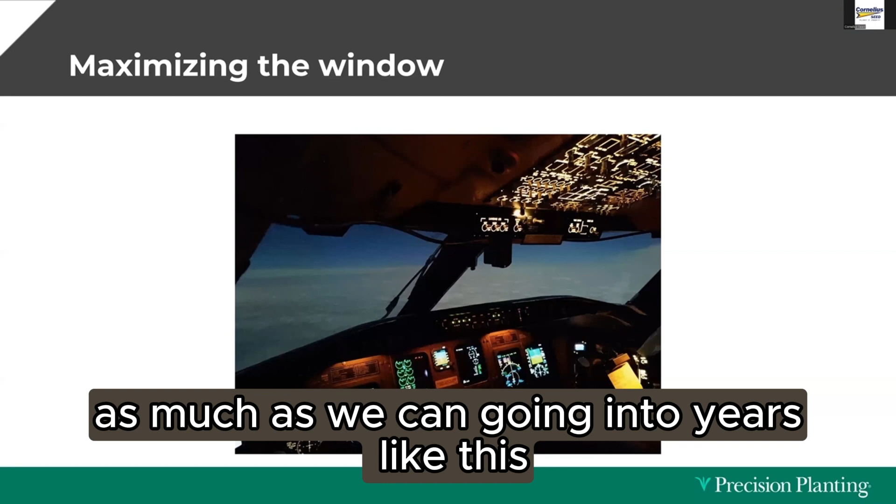So as you guys think about getting ready to get in your cabs, and you got these great big windows out front, we'll think about flying. Anybody go down to Florida or down to the beaches this year? You got on the airplane, and we got the pilots up there. They got little bitty windows on these big airplanes driving us around the world. But they actually are trusting in something else.

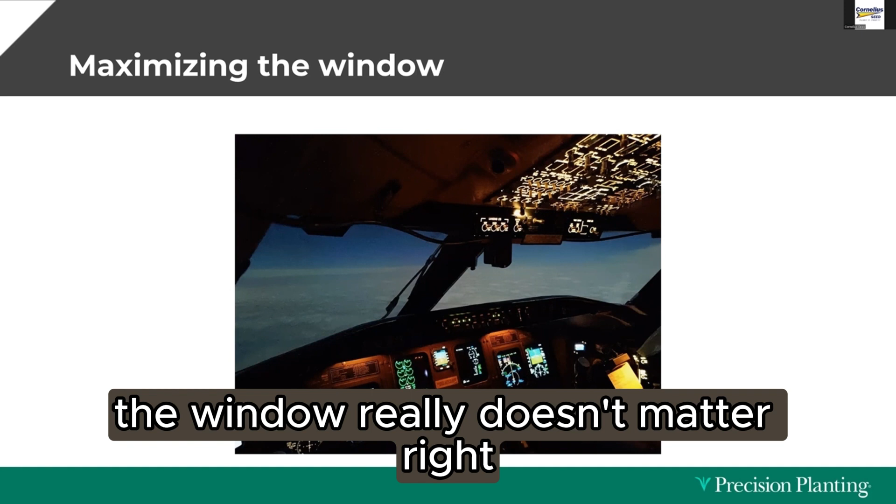They're trusting in their instruments and gauges, correct? So as they're flying you guys across the world, they're getting ready to land these big planes with hundreds of people on them. The window really doesn't matter, right? It's the data and the information that their gauges and dials are all helping them make the right decisions to get that plane on the ground safely.

So as we go to the field, I'll actually argue that you guys have the same scenario. When you look out the back window of your tractor as you're going across the field, can you tell me you're doing the best job that you can? Can you tell me that there's one seed coming off the plate every time? Can you tell me that you closed the trench properly as you went across the field? We can't, right? There may be 2 arguments.

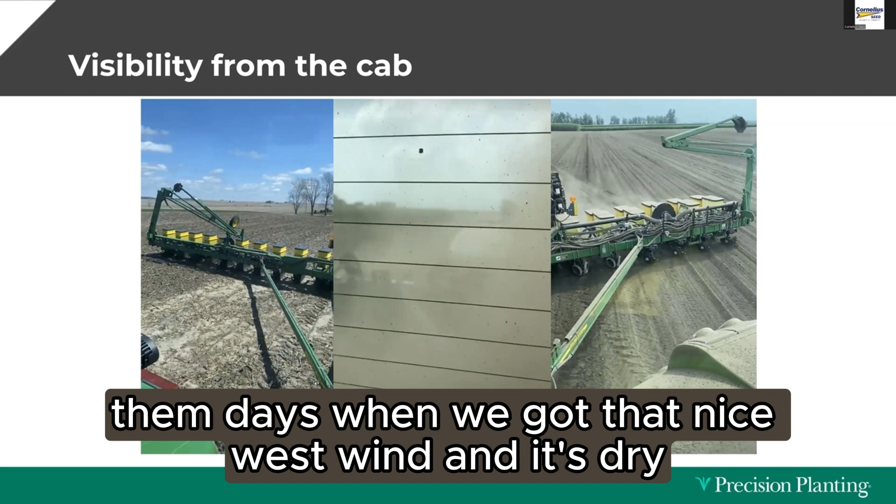You may be able to tell me on a dusty day that the vac fan's running, and you may be able to tell me that the row cleaners are working somewhat, right? But other than that, we can't truly be confident in what that planter's doing sitting in the tractor seat. And we can even say, well, them days when we got that nice west wind and it's dry and we're planting east, we can't see anything at all, right?

So my question to you to start with is, do you have visibility in the cab? Do you have the right dials and the right tools telling you what's coming out of that planter? That you're confident going forward, understanding that I'm going to have that picket fence stand, I put everything in the right spot, I put it at the right depth, I close the furrow all right from that planter pass in my cab. Make sure you guys are setting that up. Make sure you trust the instruments and tools you have in your cab to do that.

The next thing that I want you guys to think of as you're going to the field here, especially as we get planters out of the sheds, especially with this warm spell, get them out now. There's not too many years in February we can get them out of the shed and not have to worry about getting salt and sand and snow and everything else all over them. Maintenance, making sure that our planters are mechanically sound as we go to the field, is crucial.

I've said it a number of years as I've been here. It's amazing to me how a $10 part can bring hundreds of thousands of dollars in technology to its knees very quickly. We don't fix one little piece on a planter because it'll last another year, and our technology is not maximized, it's not utilized properly when it comes to that. So I will tell a guy when we're looking at planters, don't buy this, fix it first.

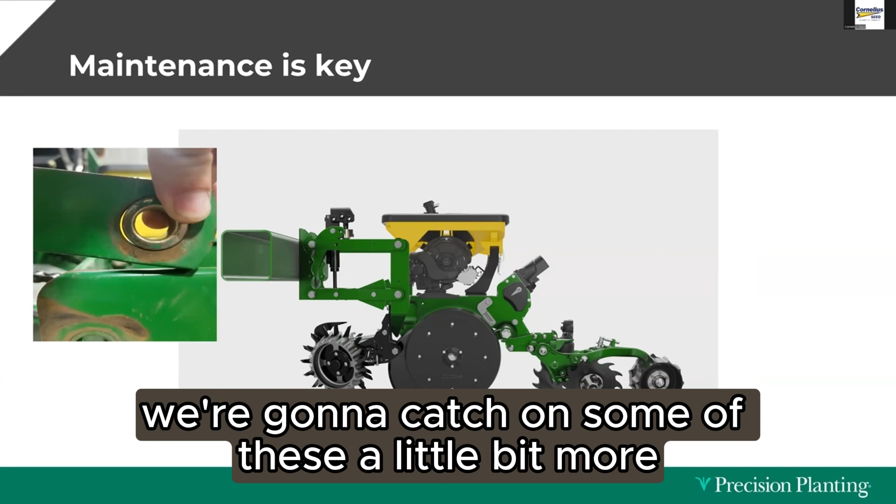So as we go through there, we're going to touch on some of these a little bit more, but I'm going to go through these kind of quick. We've got parallel arms, right? Parallel arms are ready to make our planter row units nice and tight. They keep our planter from vibrating and shaking that shank when they're loose and causing seed spacing issues.

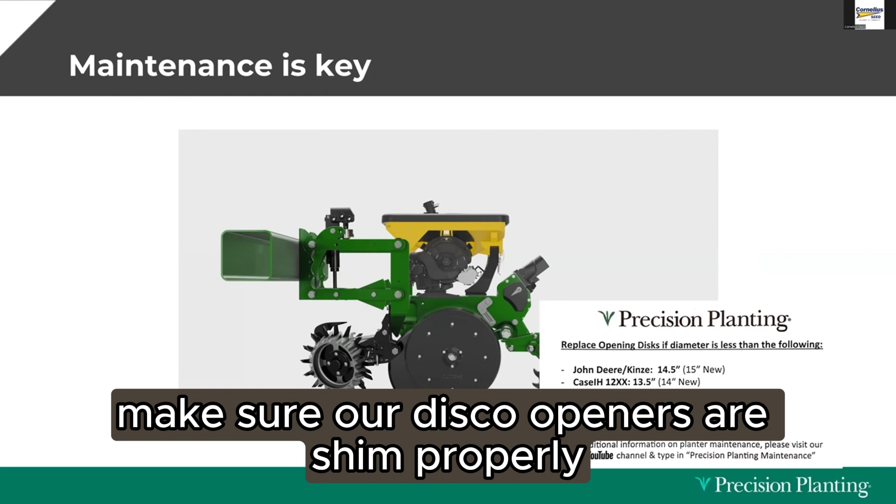Make sure our disc openers and gauge wheels are all settled into each other. Make sure we have no gaps letting dry dirt fall in or wet dirt get in there and mud up the trench. Make sure our disc openers are shimmed properly. We'll talk about that a little bit more.

Make sure our seed tube guards are up to snuff. Any Keeton seed firmers or seed firming systems you got out there. Gauge wheel arms. Any mustaches or depth stops.

So as we think about those things, again, we went through them quick, but those are the $10 parts that bring your planter down, that cause you not to be planting when it's nice out, when we break one because we didn't do the maintenance on it before preseason. And we can tie all those back to the issues you guys see in your fields when we go out scouting after the crop has come up, or maybe at the end of the year when the ears are out there and we're going out to look at them.

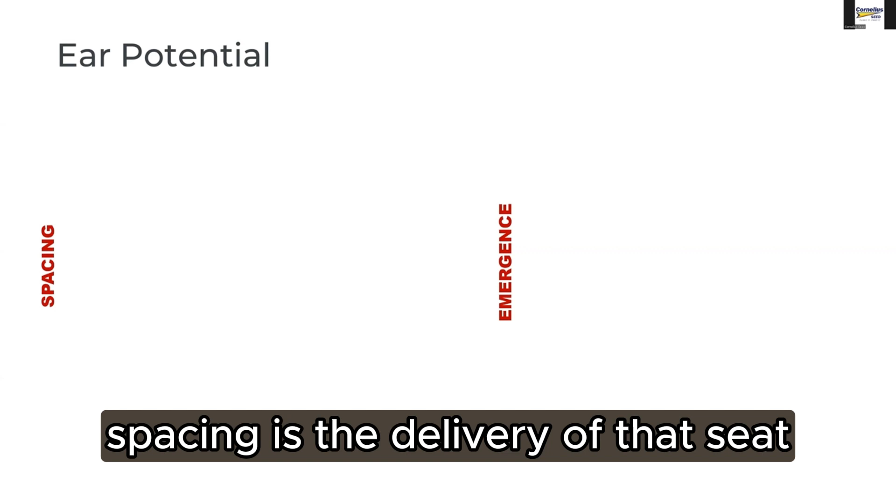So when we think about ear potential and we think about some maintenance items, when we look at spacing, spacing is the delivery of that seed. Okay, so singulation is what our meter is doing. Spacing is really everything else. It's the delivery of that seed. So if you've got a ground drive system, you've got a hydraulic drive system that has hex shaft, chains, bearings, all that. That delivery, how those systems are working, is what causes the spacing issues on the ground.

The roughness of ride as that planter bounces across the ground causes spacing issues. Making sure all the things on that planter row unit are tight so that we're keeping that thing from bouncing and shaking.

So when we think about ear potential, we think about what do these errors cost us on the farm. So a spacing error, we lose about 1/10 of an ear for a minor misplaced seed. A minor misplaced seed on a 30-inch row for us is anything within 4 inches of another seed. It means they will cannibalize each other. They're having to fight over and share the water resources and the nutrient resources in that area.

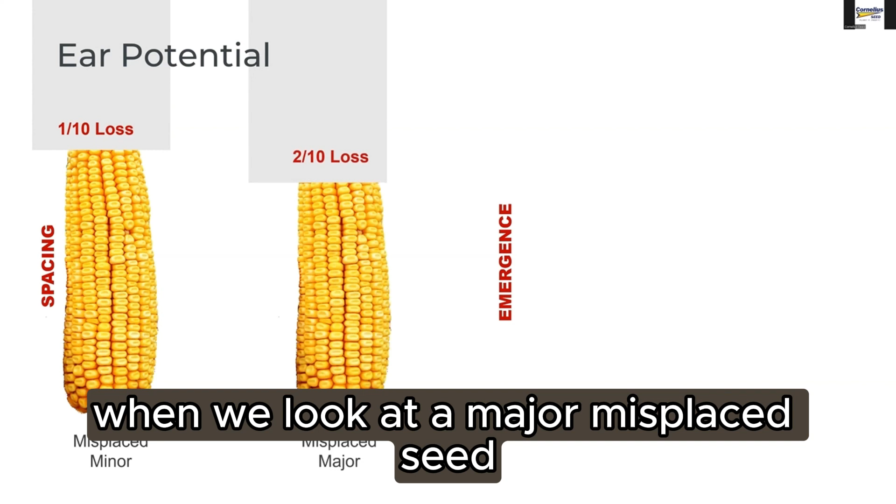When we look at a major misplaced seed, we lose about 2/10 of an ear. And those are seeds that are within 2.5 inches of each other. Again, they're cannibalizing over that same stuff. Not enough nutrients and water in that area.

And so as you think about those spacing errors, as we cause issues and we cause that bounce and that drag of seed, or we don't have seeds in the right spot, one of the big culprits now is high-speed planting. As I think about seed spacing, a guy that tries to plant high speed without the high speed equipment on his planter has errors, has spacing errors.

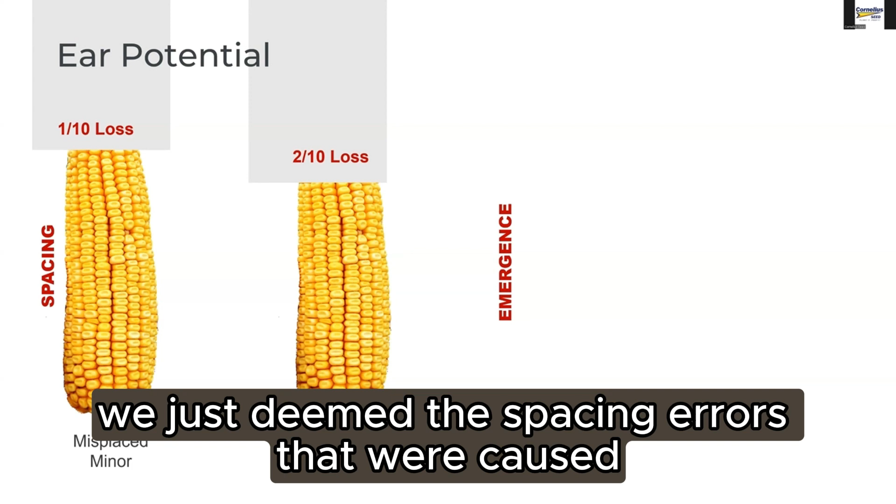The curve in our seed tube is made for 3.5 miles an hour. It offsets the velocity of seeding at 3.5 miles an hour. So when we've been planting 4.5 to 5 over the last decade, we just deemed the spacing errors that were caused during that okay, acceptable. Because at 3.5 mile an hour, we're offsetting that velocity with the curve in the seed tube.

So as we think about high-speed planting, we've got to offset that by having these belts in our systems to offset the speed as we move forward. So making sure that's one major spacing thing that comes into play.

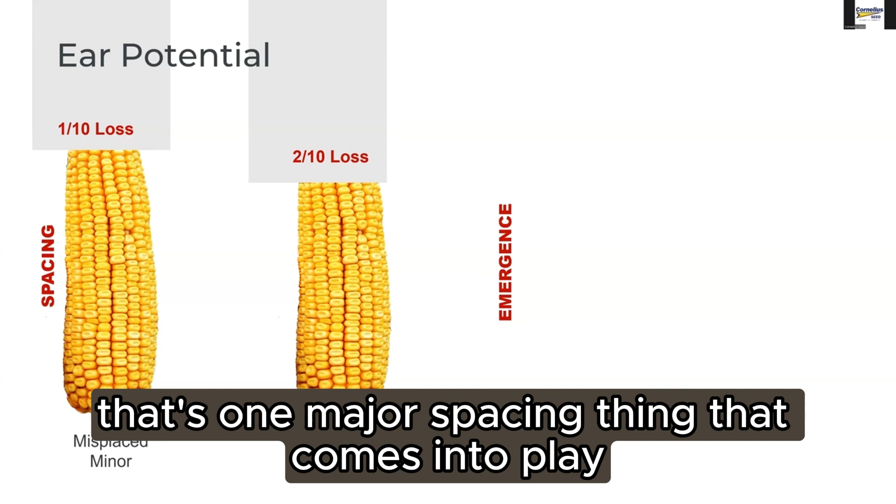As we look at emergence, we look at when those plants are coming up, are they all coming up together, right? That's our emergence. Emergence can really be looked at and linked back to management decisions. And we're going to talk through a few of these again here today, just like we are going to be talking about spacing error stuff. But our emergence comes back to management decisions.

Did I replace some of the wear parts that should have been replaced, or did I leave them? Did I plant too wet? Did I plant too dry? Those type of things are what causes us maintenance or emergence issues. When we look at emergence issues, they hit a lot harder than what spacing errors do.

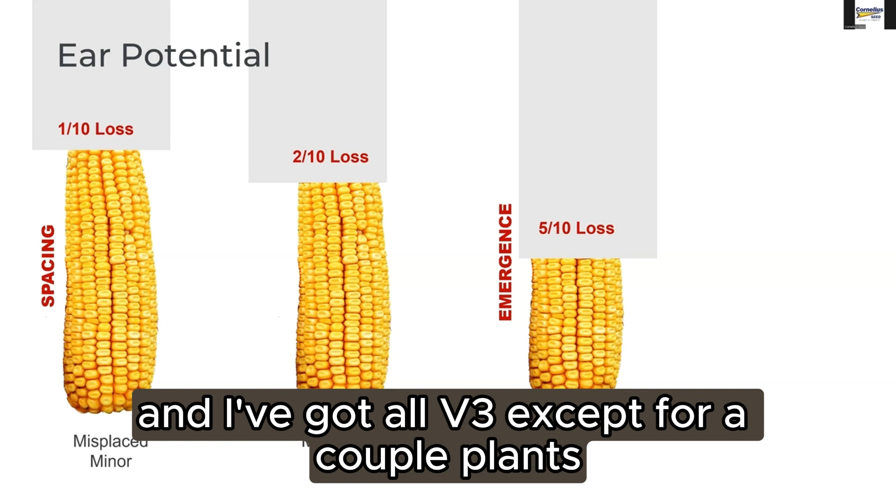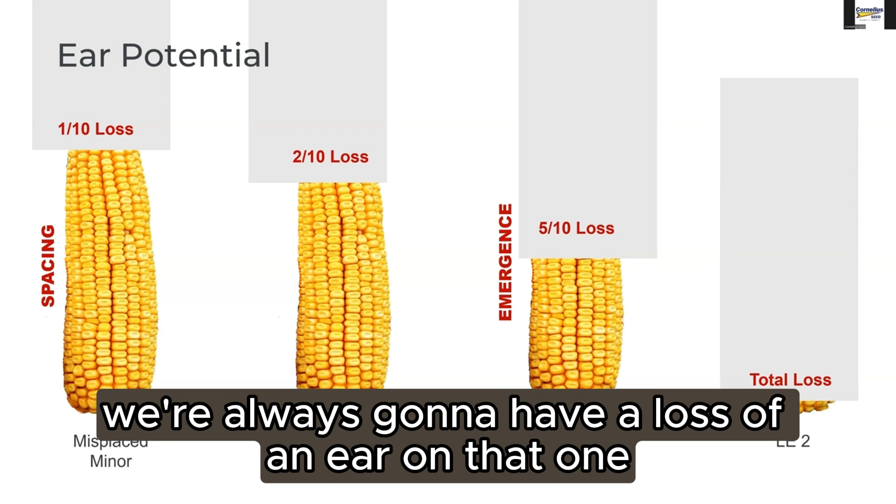So if I get a plant and I'm out scouting, and I've got all V3 except for a couple plants, if I've got a V2 plant in that field of V3 corn, I've now lost half an ear on average of those. Every one of them is a half an ear. If I actually find one that's 2 leaf collars behind, say I'm in a field of V3 when I'm scouting, and I've got some that are just at the first leaf, or just spiking up, I've lost a whole ear there. There's nothing left of that ear because it's behind. It's going to continuously fall behind. It's never going to catch up. It's not going to get the sunlight interception it needs to produce grain and fill it. So we're always going to have a loss of an ear on that one.

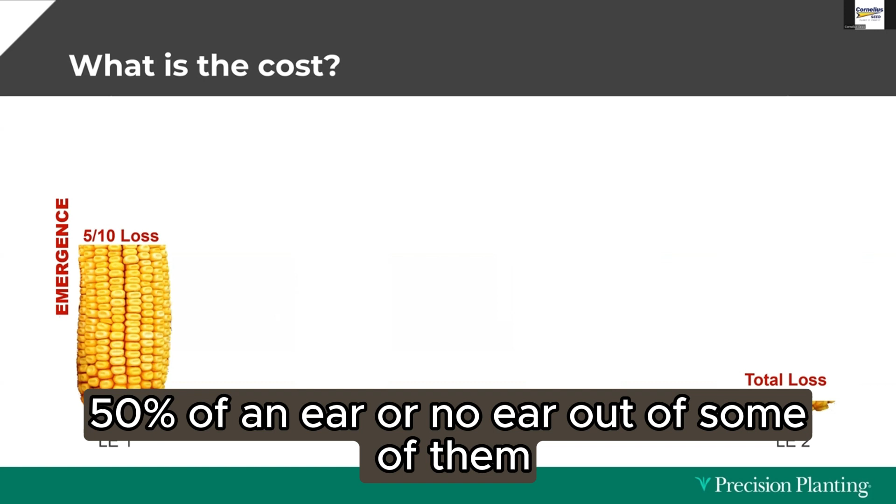So what do those cost us? As we think about the cost associated with these, a lot of times this is where we don't break it down, right? We don't break down what these errors in our fields cost us. But we also need to remember, I've put 100% of every input into each one of these. I put the same seed cost into every seed I put in the ground, the same fertility plan on every seed. Am I happy to get 90%, 80% of an ear, 50% of an ear, or no ear out of some of them? Shouldn't be, right? I want to get a full ear out of every seed I put in the ground.

So what's it cost us when I have one leaf collar behind? We'd take 1/1000th of an acre on 30-inch rows, that's 17 feet 5 inches. We know through our years of research that if I lose one ear in that run, that'd be 1,000 ears per acre, I lose 7 bushel. We're going to say a loss potential of $5 - I'm from Southern Iowa, I won't want to take my shoes off, so I'm using it for easy math. I know it's a little high where our markets are today. So that equates to $17.50 an acre.

That's on one row, right? We did one row of a yield check. We figure the average planter per row plants 100 acres a row, that's probably honestly a little low in our area. So if I think about that, one issue, one plant in my 17 feet 5 inches of a yield check, for each row I have one of those on, that's $1,750.

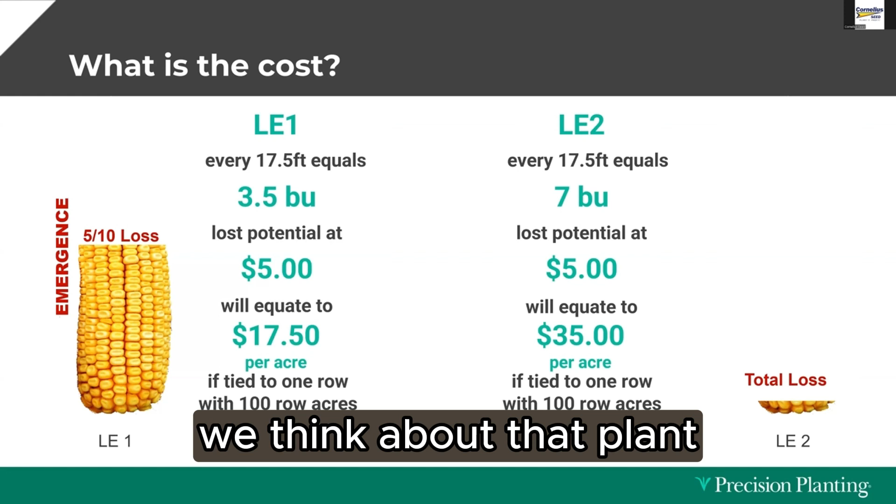Is it okay to fix maintenance items? Yeah, we can fix them pretty quick and we can pay for them pretty quick. Now we can make it hurt a little worse when we think about a whole ear gone, when we think about that plant that's 2 leaf collars behind. It's $3,500 a row per year. So making the correct decisions, making the maintenance decisions is crucial.

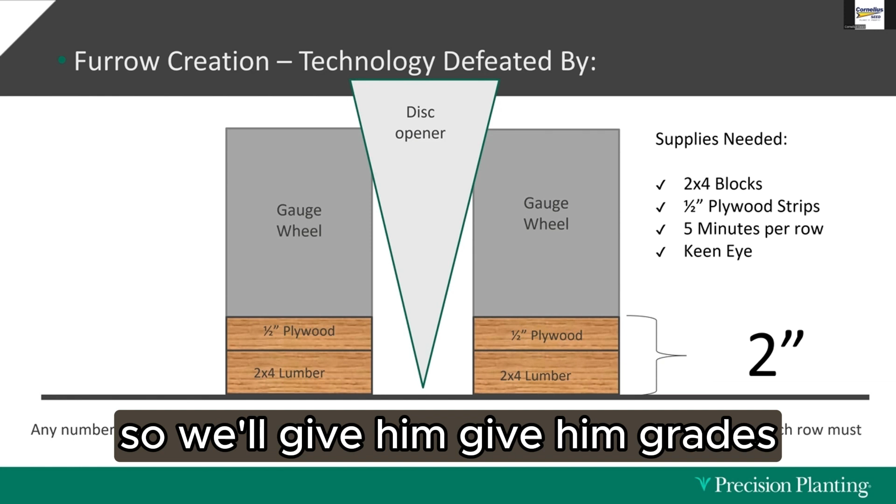One of the ones that I'm going to go through, some of the ones that are really costing guys the most here - that's what we're going to talk about today. First one is, have you calibrated your depth on your planter? Anybody ever heard of this? Couple guys? Have you done it? No? Uh-oh, he's got a C- grade for today, so we'll give him grace. When you calibrated it, did you find differences? 5 rows were different. So what he's saying is, when he calibrates this, we put these blocks underneath there, we see where's my true 2 inches of depth. He's got 5 rows out of 24 that are planting a different depth than he wants to.

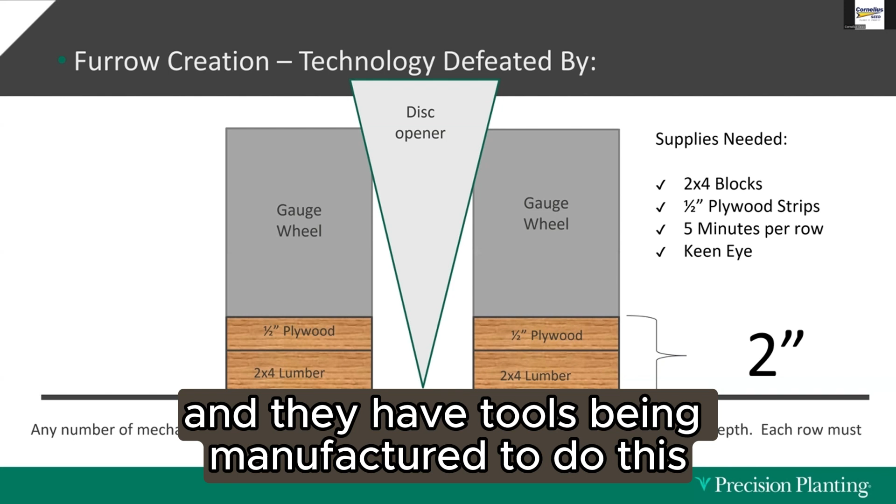Different depth could mean the difference between being in dry dirt or in the moisture line, right? So as we do these, I challenge you guys to get your planters out here. There's a number of ways you can do it. Some dealers have built tools being manufactured to do this. You can take a block of wood on the bottom of a jack and make a 2-inch lip on it. Number of ways you can do it. But basically just go in and take that calibration, right?

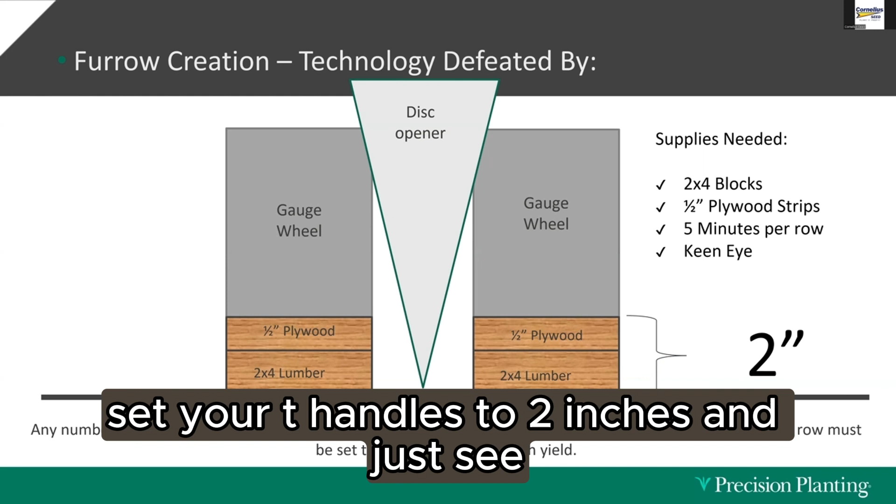You're going to go through and create like a 2-inch step, right? So you're going to lift those gauge wheels up 2 inches, set your T-handles to 2 inches, and just see, are my disc openers touching the base? If it's cement you're setting it on, is the tip of the disc opener sitting on the cement? If it's not, and it's up in the air hovering like this, I'm planting shallow with that row. If the disc openers are holding all the weight of the row unit and my gauge wheels can spin, that means that row's planting deep, and I'm going to have that difference.

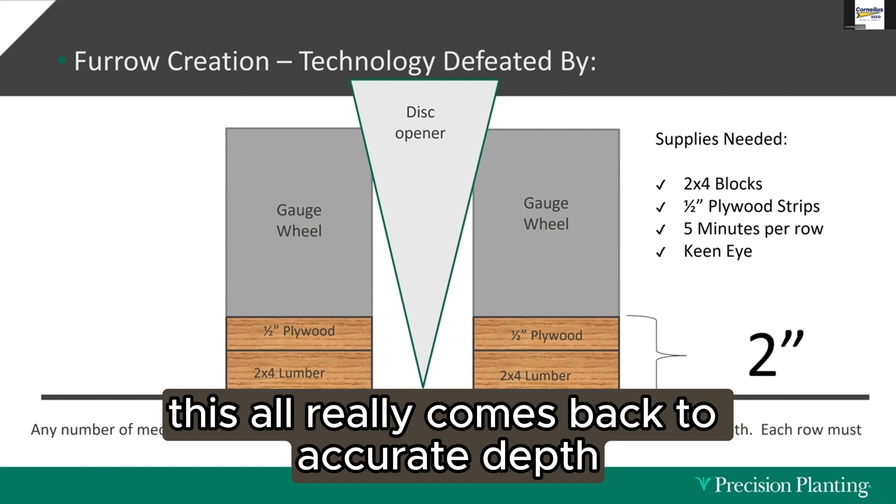When we think about it, again, this all really comes back to accurate depth. We want to make sure we know that when we set that planter's T-handle, that we know where 2 inches is. So here's your tip.

You're going to take a paint marker and mark by each one. You may have some rows that are at 4 and 4. You may have some rows that are 4 and 5. You may have some rows that are 5 and 5 to be 2 inches. But that's where your 2 inches is. You're going to take that paint marker and mark the shank for that year. And then that way you know, as you adjust going through the season, where your 2-inch line is. That's not going to be where you're carrying the weight of your load on your tires and everything.

This is strictly setting how deep our disc openers are compared to the bottom of our gauge wheels. So, yep.

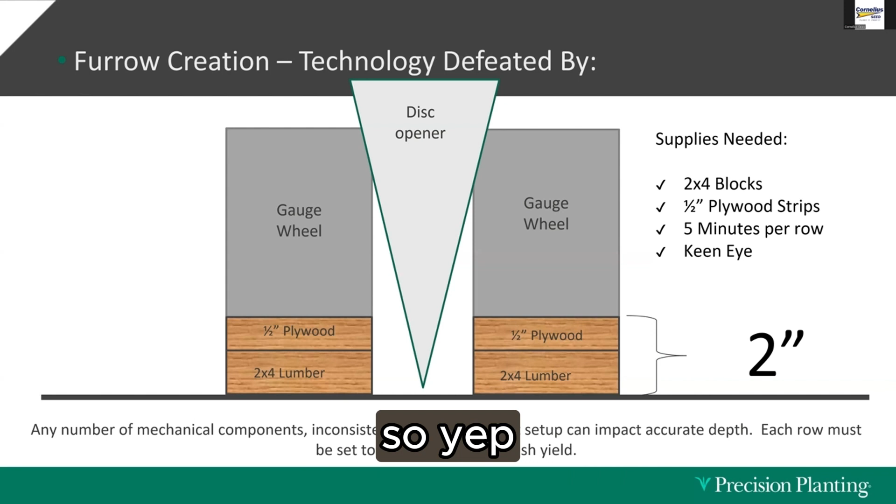With that, I've seen 3/4 of an inch difference on new planters out of the factory. I've seen 1 inch plus. These are horror stories, right? These are the worst case scenarios. 1 inch plus on used planters. So make sure you guys are checking these things because we want to make sure we're planting at the correct depth.

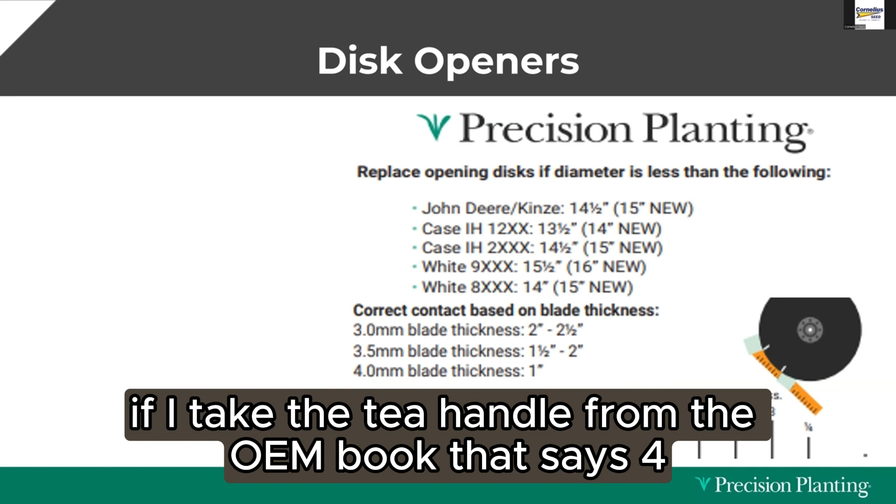One of those things that causes depth changes from year to year is disc opener wear, right? Let's think about the simplest thing here. I'm willing to let a disc opener wear a 1/2 inch. If I take the T-handle from the OEM book that says 4 or 5 is 2 inches of depth, and I'm allowing a 1/2 inch of disc opener wear, did I adjust that on my T-handle? I didn't, right? So a very simple, hey wow, that connects the dots for me, right? I should adjust for that if I'm already allowing a 1/2 inch.

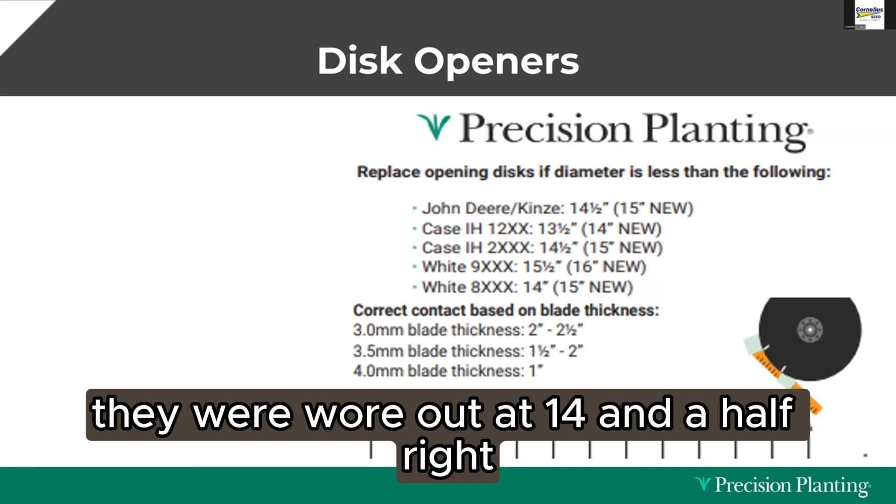So we know 1/2 inch of disc opener wear is when we need to replace them. Everybody's a good farmer — I always have a dealer call me and say, you'll never guess the record this year on disc openers. I just took a John Deere disc opener off and it was 13.5 inches. I got called yesterday on this, guys. On the way here, I was leaving Dubuque talking to a dealer and he says, I got a new record, 13.5 inches on a John Deere disc opener. They were worn out at 14.5, right? So make sure you guys are doing that.

If you're really good, I guess you can market them, right? So if you're a white planter with a 9,000, you got 16 inch new. When you wear yours out, you can sell them to the neighbor with the John Deere planter. You can start over with them, right?

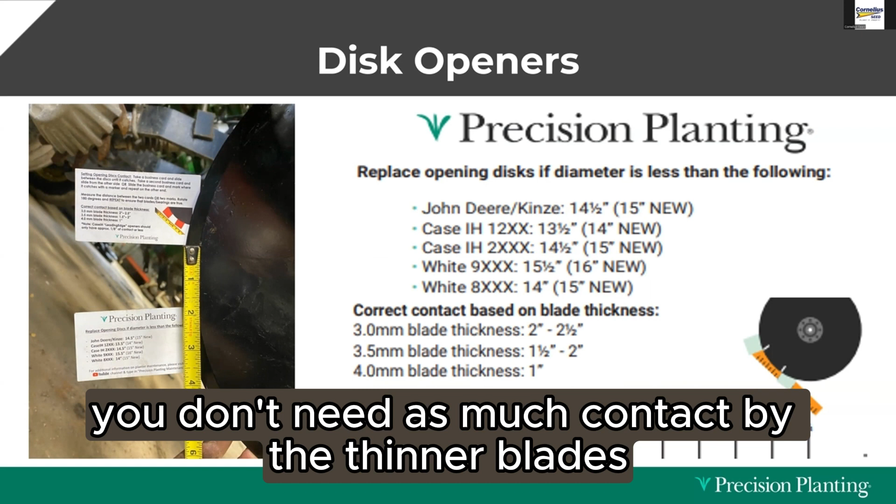The other key thing when we think about disc openers, guys, is we want to make sure that we're shimming them correctly. You want to make sure that you're getting that right contact point. This is what's creating that true V cut at the bottom in the soil for us. So if I need to know my blade thickness — with aftermarket blades, typically they're a little heavier, a little thicker, you don't need as much contact. The thinner blades, maybe at an OEM, they're going to need more contact, right? They're going to need to make sure those contact a little bit more. So as we think about those, get those things shimmed up right.

But not only that, when we talk about disc openers, this is one of the things that's really, really eye-opening for us these last couple of years — disc openers are not all made equal.

Plain and simple, they're not made the same.

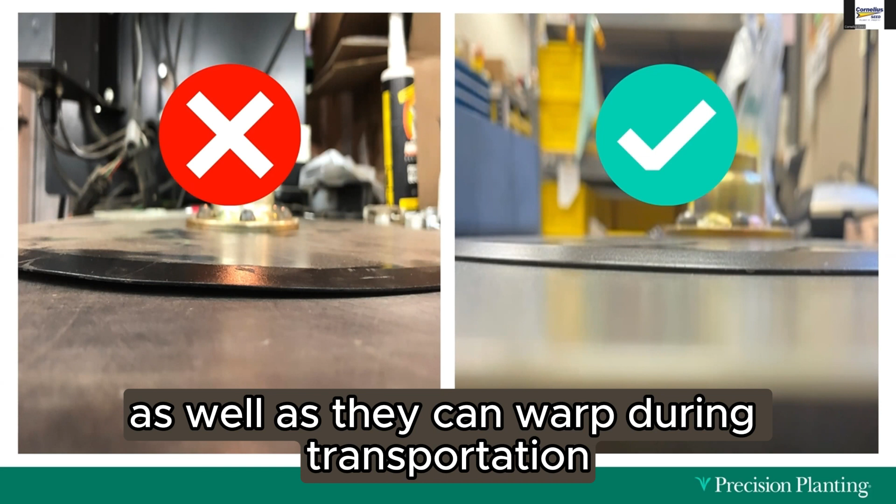So the first test I want you guys to do when you're installing new disc openers: lay them on a flat surface. Make sure they're flat, make sure they're not warped. These blades go through heat treating processes, most of them, and they can warp during that, as well as during transportation. Think about most of them, they come in a big wooden crate, piled on top of each other, bouncing around in the back of a semi going down the highway. They can bend and move in there and cause issues. So make sure they're flat.

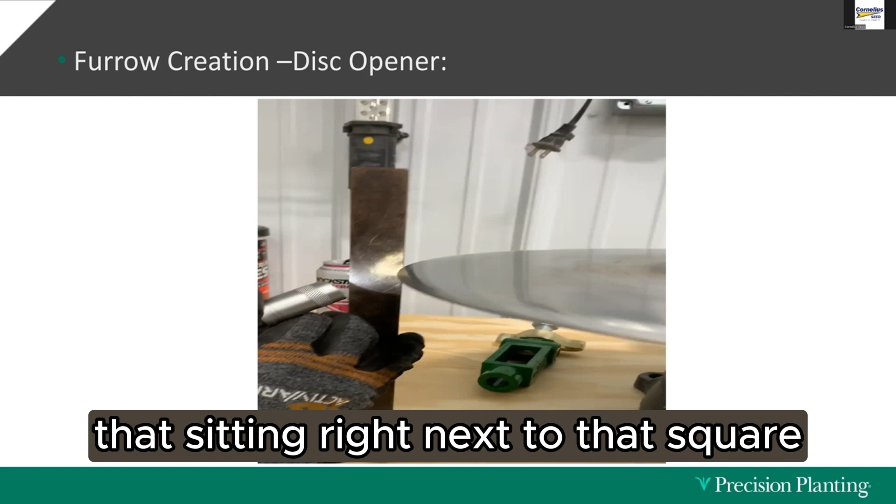The next two things I want you guys to look at is, are my disc openers true? Now when I say are they true, I'll play the video here in a second, but one is the hub riveted on the center of that blade, or did they not get it centered when they riveted it on? Or two, is the bearing centered in my hub correctly? So the two things you'll see, and you'll watch this blade do both of those: one, as it's spinning, it will go to and from that gauge sitting right next to it, that square. You'll also see it go like this as it goes around - that means the bearing's not centered in that hub correctly.

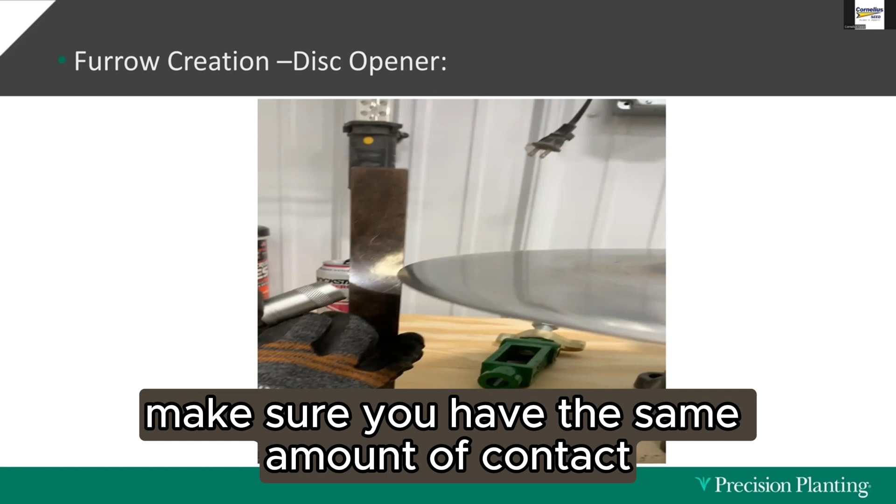If we don't have these things correct, we'll actually have different contact points of the blades as they spin around. So when you guys shim these blades, test your contact point, rotate that thing 180 degrees, check it in 3 or 4 spots as you spin those around. Make sure you have the same amount of contact as you spin those blades around when you install them. So here you'll see that - we'll watch that blade walk to and from, and you'll also see that wobble to it. We do not want much movement. What is it, Travis? 30 thousandths is the tolerance.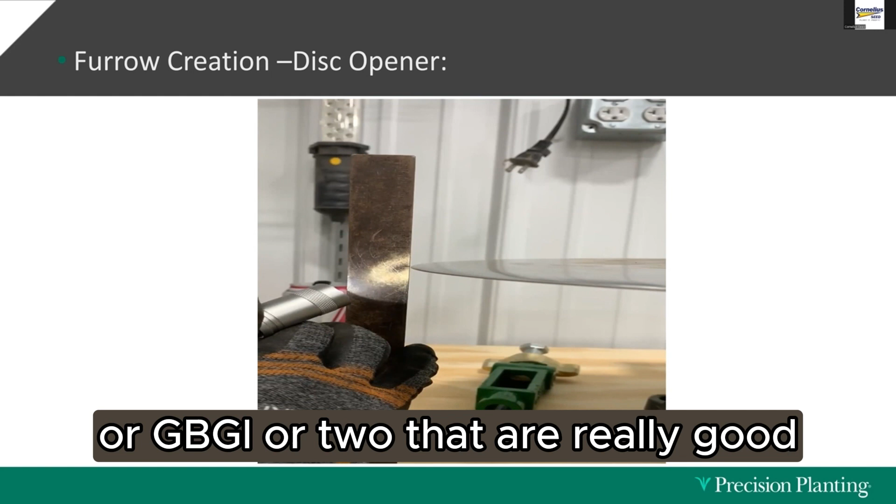So yesterday we had the question, what are some blade manufacturers that we recommend? We don't sell blades, but a lot of our dealers are connected with some higher end blade manufacturers. Companies like Wear Parts or GBGI are two that are really good, not much difference between the two of them. Honestly, my thought is GBGI is from Indiana, so guys east go to Indiana. Wear Parts is from South Dakota or Nebraska, one of the two, and most of the western guys go that way. Again, there's not much difference between them, but those would be two companies I'd recommend for wear parts that are good - they make good quality, and they have those tolerance specs.

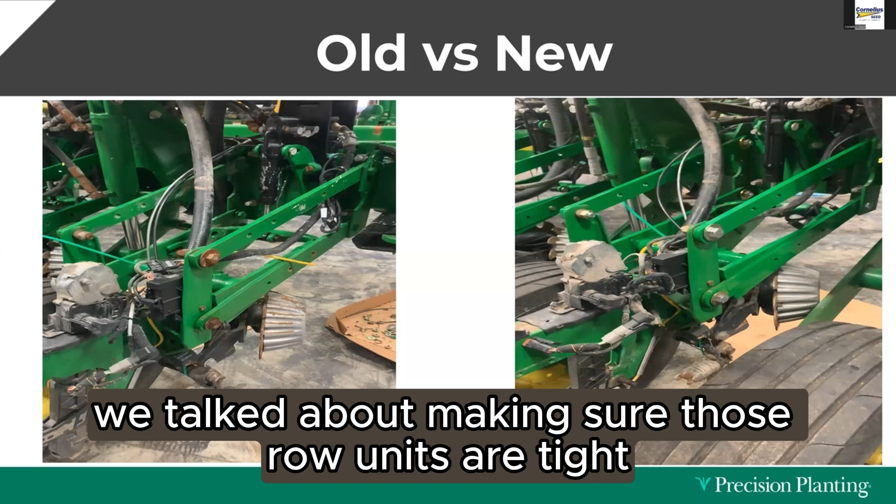So, talk about parallel arm systems. We talked about making sure those row units are tight and solid as they go through here. Here you're going to see a standard parallel arm system on a John Deere planter, really loose. Most of you guys have been around John Deere, Kinze parallel arms - you know there are things that wear out quickly. But again, all this comes back to vibration in the shank.

When we put a loose piece of equipment ground engaging and we start to pull across the field at 4 or 5 miles an hour, or maybe we've got high speed and we're going 7, 8, 9, 10, whatever - think about what that row unit's doing back there as it's in the ground. It's sitting back there chattering like this. It's not a visual, we can't see it physically doing that because it's minute, but it is sitting back there shaking. So it's shaking your meter, it's shaking the seed delivery coming down out of that meter. Make sure they're tight. You'll see the one on the right-hand side here, nice and tight, it's solid, it's not shaking back and forth.

This is a double bushing parallel arm kit from us. We replace John Deere parallel arms, either long or short, and tighten them up. They work really well - there's a lot of different aftermarket ones out there on the market. Make sure you're getting those parallel arms tight. I want zero movement. Used to be an old saying that a half inch of movement was acceptable. If I've already got a half inch of movement, when that thing gets in the ground, it's going to shake a lot more. So parallel arms need to be tight, and we have no movement.

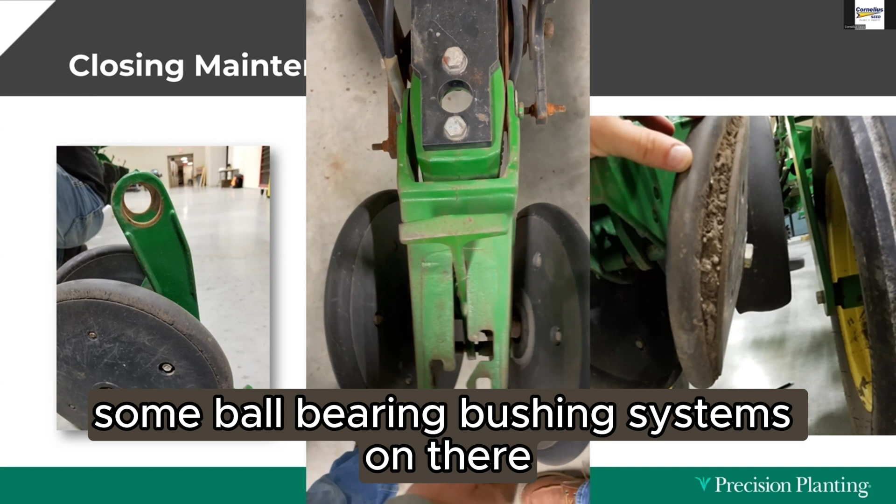Closing wheel systems are very similar. We see that egg shape, right? Everybody's familiar with those. As we look at that, you'll see the video here of that moving. Again, a loose piece of equipment being pulled across the field attached to our shank is causing vibration. So making sure those are tight. There are some upgraded kits. You can weld some ball bearing bushing systems on there to tighten those up and not have to worry about that egg shaping and movement.

But make sure those are good and solid and keeping those tight as well. One of the things we've looked at here in the last year for closing wheels is spring tension.

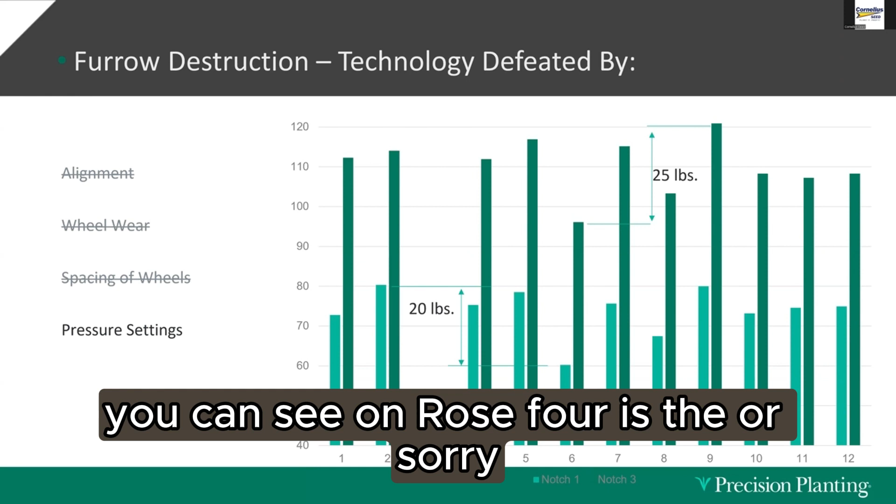How much tension do we get on a closing wheel tail in different spring notches? You'll see the lighter green is notch 1 of a spring of the tail. Put it in there, and we got a 12-row planter here. You can see on row 6 is the lowest, row 2 is the highest pressure, and there was a 20-pound difference in notch 1 when we set all of them in notch 1 and put a scale underneath of them.

And then we moved it to notch 3 for the darker green ones, and you can see that jumped up again. But now we have 25 pounds of difference, and shockingly to me, they're on 2 different rows. Not even the same rows as we look at that.

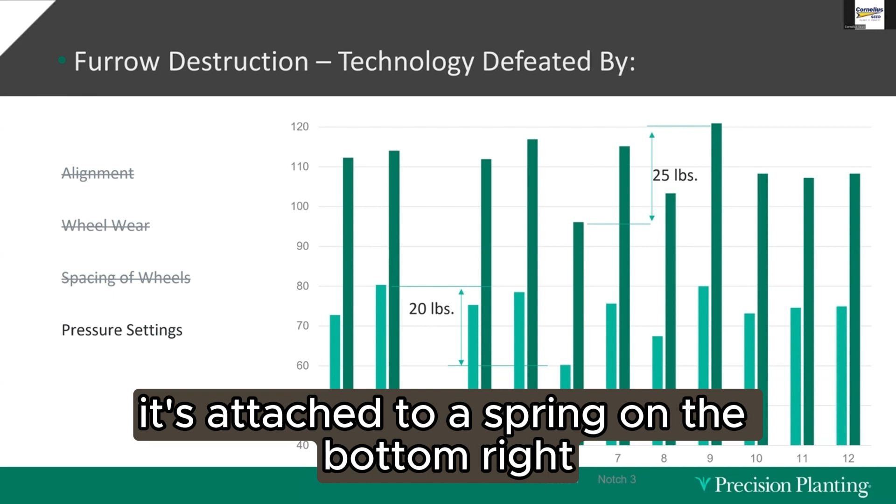So as we think about that, understand that there are wear items on those closing tails. When we've got that T-handle set back there, it's attached to a spring on the bottom, right? A lot of times our springs get worn out. I've seen where the tabs on that T-handle at the bottom where the spring hooks in, about wore through, if not wore through for some guys, right? So making sure that you're looking at those things and getting that maintenance up to snuff.

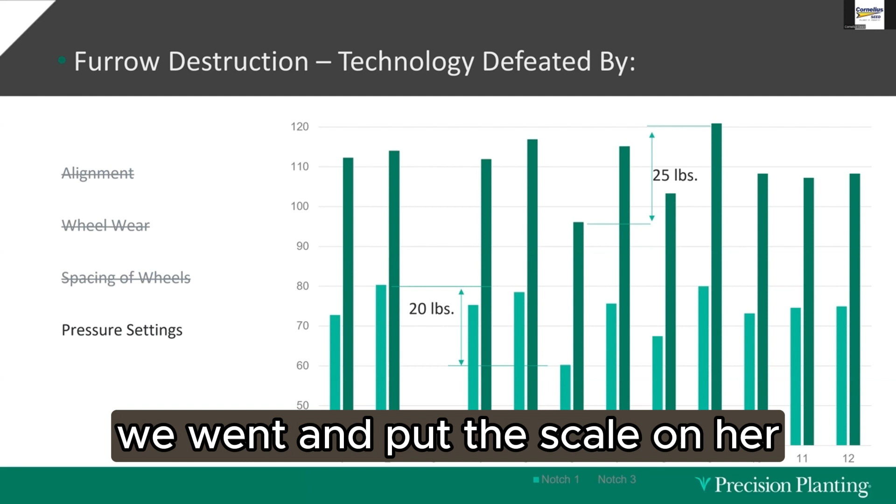You'll see here on row 3, we're missing some bars, aren't we? You can actually install the T-handle backwards and not have any spring pressure on your closing tail. Doesn't look much different, but if you install that T-handle backwards, it can put no pressure down on the ground. So this one, when we were doing this, didn't know it when we did it. We went and put the scale on it, and we kept getting no readings on row 3. Figured out that the T-handle was backwards. So make sure you're watching those things to get that stuff right.

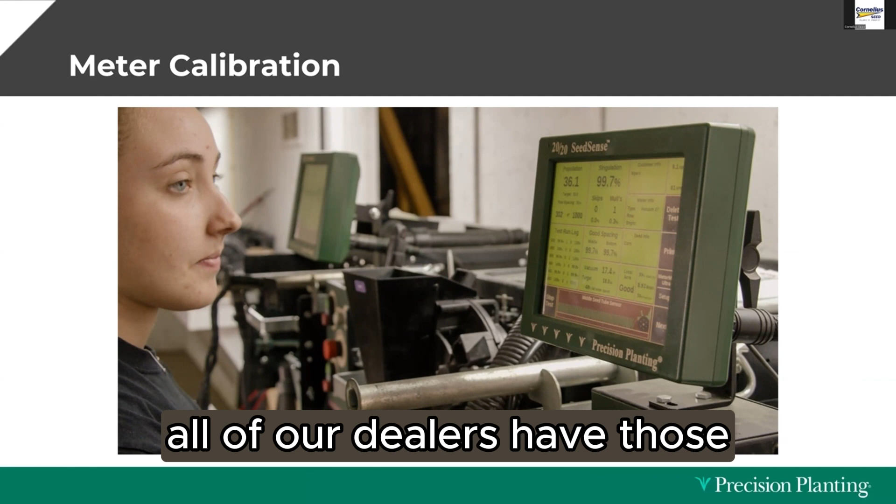Meter calibration. We will always say this is where precision planting started, was the meter calibration systems. All of our dealers have those Meter Max Ultra test stand kits. They run anywhere from a finger meter all the way to the new vac meters.

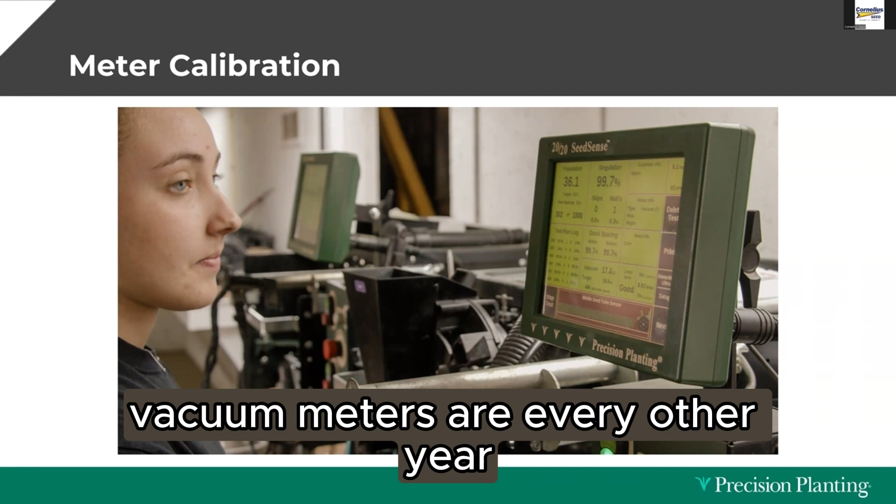Any brand that you want to, but making sure your meters are putting out 1 seed per flight or 1 seed per cell on your discs as they're going across the field is crucial. If we're putting out doubles, skips, triples, whatever it may be, we've got errors that we can't fix, right? We're costing ourselves money as we go through. So make sure you get your meters ran. We recommend finger meters are yearly, vacuum meters are every other year. Make sure you're getting them checked.

So with that, we're going to move into putting ourselves in a good environment. What is the best environment that we can put those seeds in? And there's the 3 C's I want you guys to take home today. I want you to think cleaning when I go across the field. Am I cleaning that furrow correctly? Am I putting that seed in a nice, clean environment? We know that if we're going across the field, we know that residue causes us agronomic issues, right? It wicks moisture away. It has more wicking power than that seed.

To be honest with you, seeds are lazy. If they don't have to take moisture in, they won't. So if there's a piece of material laying next to them that's willing to drink that moisture up, it's going to pull away from it. We also know that insulating the soil, residue insulates the soil. Anybody ever ran into any issues with their 260, 270 bushel corn residue and a mat of residue out there? You bet, right? We're all running into these issues as we increase our corn yields. What do we do with it, and how do we make sure it's working for us, right?

I actually, my uncle, he's got a little 6-row 7200, but he plants into cover crops, no-till. So he had some soybean stubble. He was planting his corn into this. And I went out and we just took a temperature gun, and I scanned the top of the residue. It was 56 degrees a day. The residue was 55 degrees, the top of it. Sunlight was shining on it.

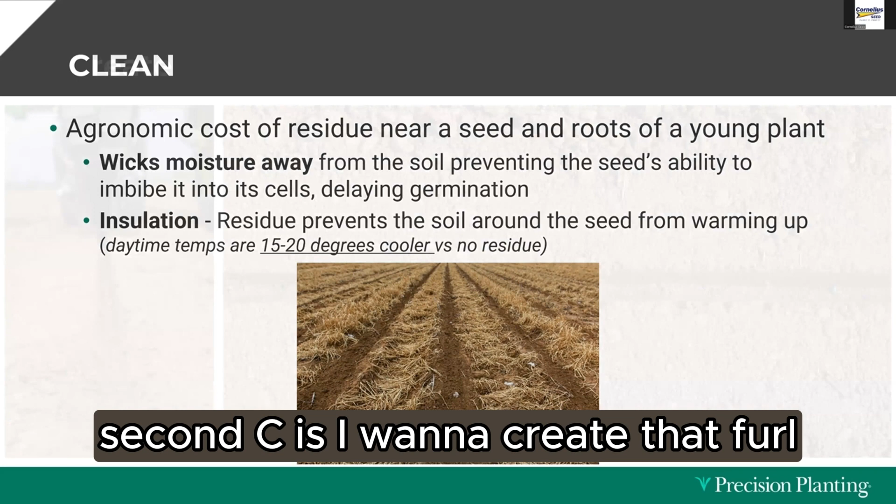Second C is I want to create that furrow. I want to make sure I create a good trench where the seed goes to the bottom. We'll talk a little bit more in depth about what we look at for those.

And the third one is close. I want to make sure that I'm closing that trench out, because the ultimate planter pass, guys, is when it looks like we were never there. That's the ultimate planter pass. My closing wheel system does its job. Should know that that planter was never there. I should have no blocking, no sidewalls. I should have no issues for those root systems to go out and find all the nutrients and the moisture.

So as we dig into that, really these 3 C's come back to emergence. Getting that crop up at the same time, all together.

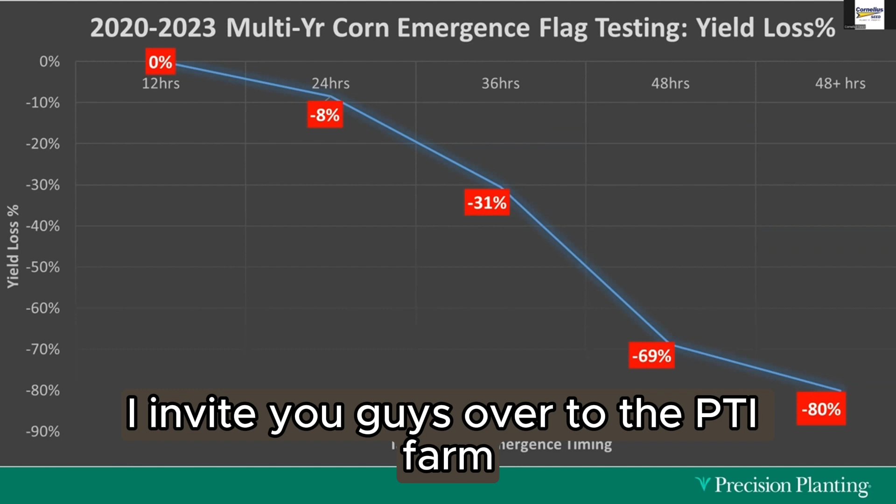We've done a number of studies, and we continue to do them over at our PTI farm over in Central Illinois. You guys get a chance this summer, I invite you guys over to the PTI farm. It's a 400-acre farm in Pontiac, Illinois, where we do agronomic studies. And most of the stuff has nothing to do with precision planting. Fertility studies, strip cropping, corn emergence. What are some different treatments that can get us better corn emergence and stuff?

So I invite you guys to come over. We call it the farmer's playground, to be honest. You guys get to drive tractors. You guys get to go on agronomy tours. It's a fun day.

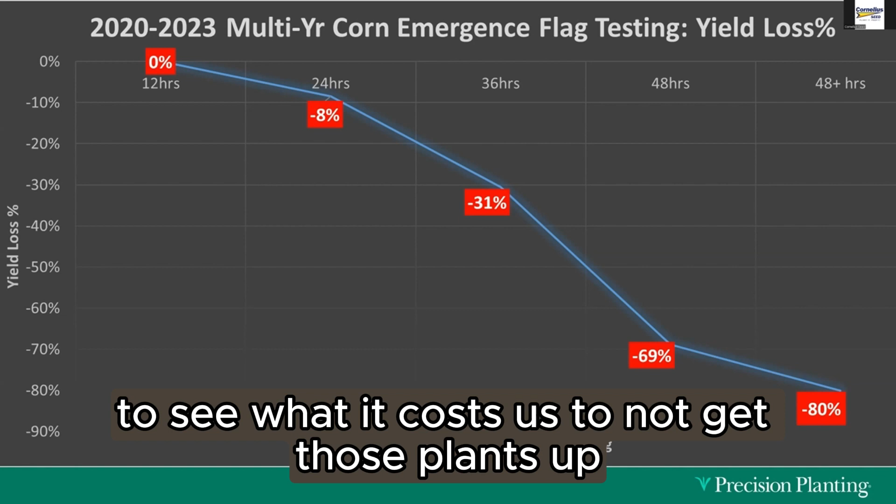One of the studies we've done is our multi-year corn emergence flag test. This is to see what it costs us to not get those plants up at the same time.

We used to go back and say, hey, you know what, we used to like to get everything up within 1 week. Then as the years went by, it was hey, 48 hours, we want everything up in 48 hours. Then it went to 36, and then 24. Now I'm sitting here today telling you I want it less than 6 hours. I want everything up at the same time. That's a hard job, very hard job.

But we have studies where if there's a plant that comes up 1 hour later than its neighbor, there's a yield loss. It is minute, but there's yield loss for 1 hour of difference. So it's crucial to get them up at the same time.

So as we look at this, we go out and find that first spike in our plot. We give it 12 hours from the first spike we see come up. That's our 0%, that's our baseline. We go back 12 hours later and count any additional ones that come up. On average, they lose 8% of ear weight in 12 hours.

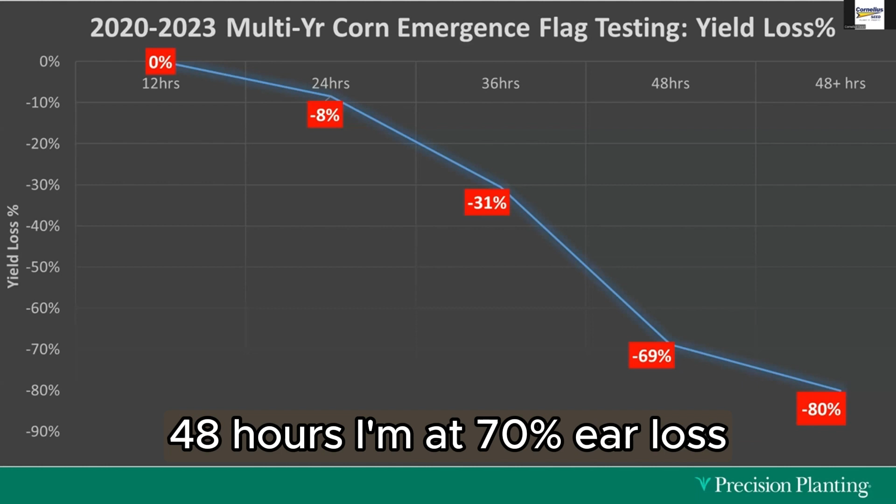Might be able to handle that. Might not be the end of the world. But at 36 hours, I'm now at 31% ear weight loss. At 48 hours, I'm at 70% ear loss. We get the impact of having these things come up at the same time, right? We're not profitable if we get past 36 hours on that ear.

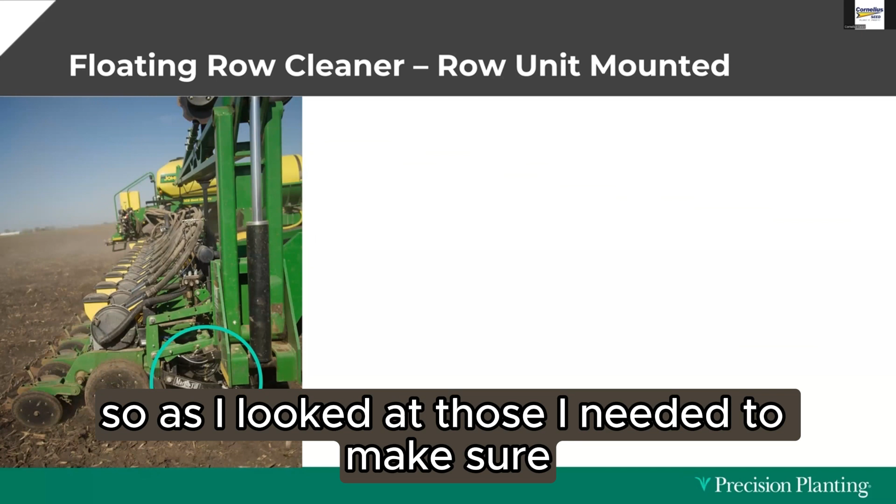So floating row cleaners are crucial, guys. As we look at that row cleaning system, we came out originally with fixed row cleaners. The industry did. Fixed row cleaners were an option to help us start to manage those things. But if I've got any terrain at all, I'm either gouging or I'm not cleaning, right? Any movement in that soil. So as I looked at those, I needed to make sure I moved to floating row cleaner systems.

Then we moved to managing those floating row cleaner systems with an air cylinder to manage that weight distribution, because if I go from a no-till field to a tillage field, I've got a set weight on that row cleaner. I needed a little extra, I needed a little less depending on which way I was going. And then we also had different wheels themselves. So depending on the conditions you guys are getting, we've got finger wheels, we've got the disc style wheels, or shark tooth style wheels to help us manage those different conditions and scenarios that we go through.

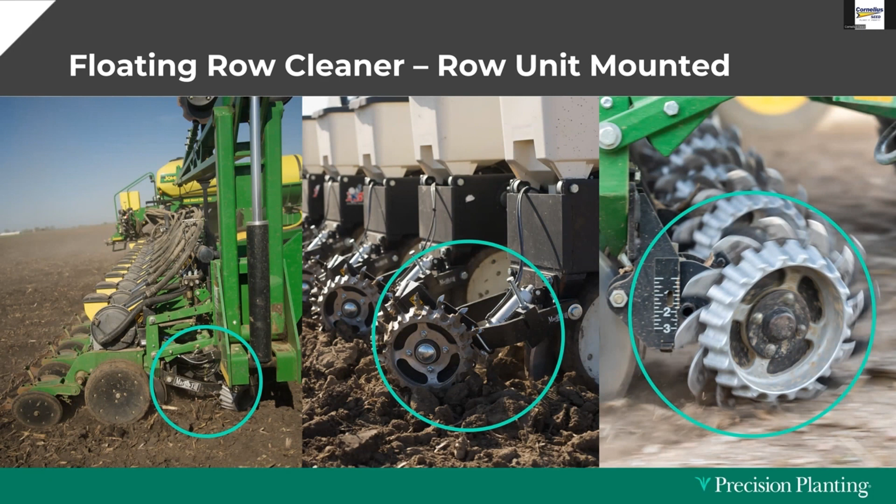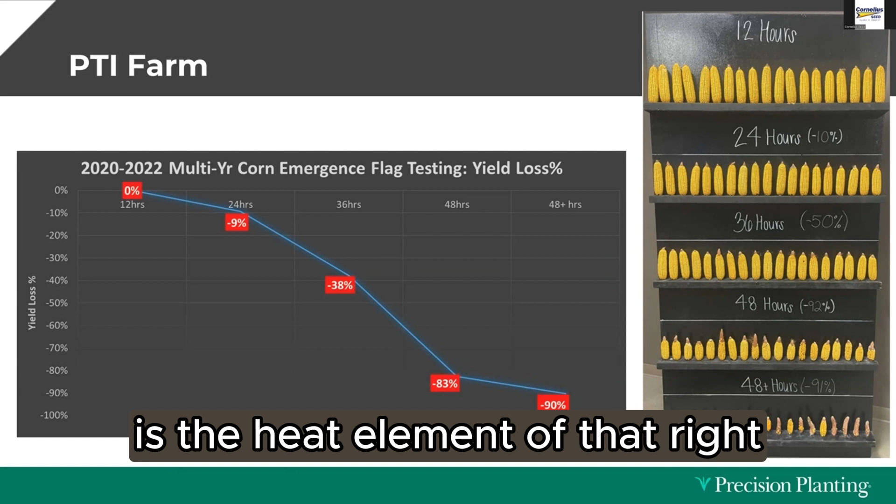To get everything to germinate at the same time is going to help me get everything emerged. I need heat and moisture, right? So cleaning, the crucial part of cleaning is the heat element of that, getting that heat, that sunlight into that soil to heat it up around that seed.

So just like any good company, we did 15, 20 years of research into cleaning systems and how do we help you guys. We ended up developing our own because we were finding these flaws, we weren't seeing them get fixed, and we couldn't figure out how to make them better for you guys. So one of the big downfalls with row cleaners is they're mounted to the front of the shank.

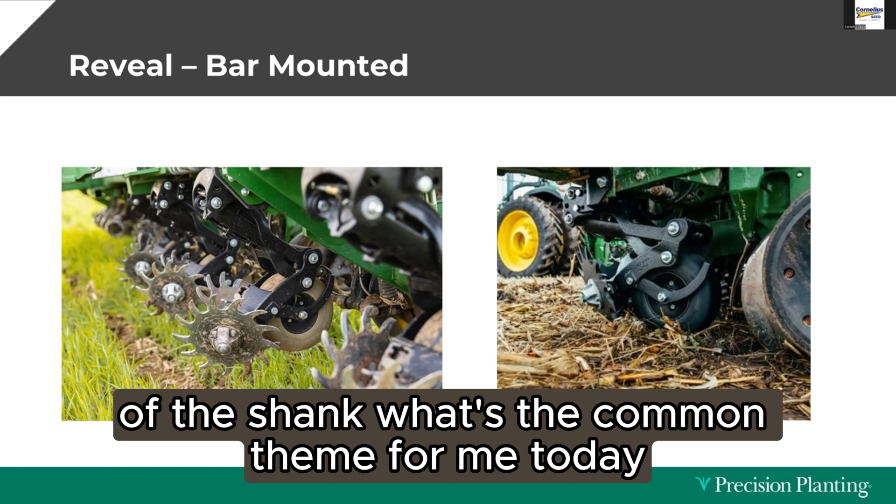What's the common theme for me today? Keep vibration out of the shank, right? So as those shanks are sitting there shaking and moving, hitting every berm, every clod of root ball from last year, they're sending that shock into the shank and shaking it. So we moved those row cleaners from the shank up to the bar and made them bar mounted.

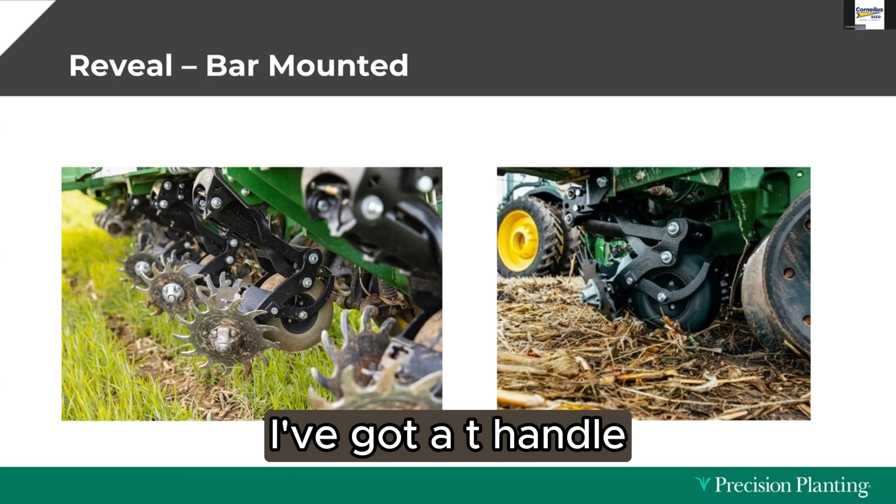We made them rear trailing so they take up the same real estate. But some of the cool parts about it is we ended up adding a tine engagement depth lever. So right here on the front of that nose, I've got a T-handle, just like I would be able to change the depth. When I have that internal gauge wheel in there for it to ride on, I'm able to adjust how much tine is working for me.

So if I think about, I'm just planting in a no-till soybean stubble, do I need a lot of tine length? Probably not, right? If I use the total tine length, I'm probably going to move some soil. So now I can lower that down, just use a little bit of tines to move that soil or move that residue and not move soil.

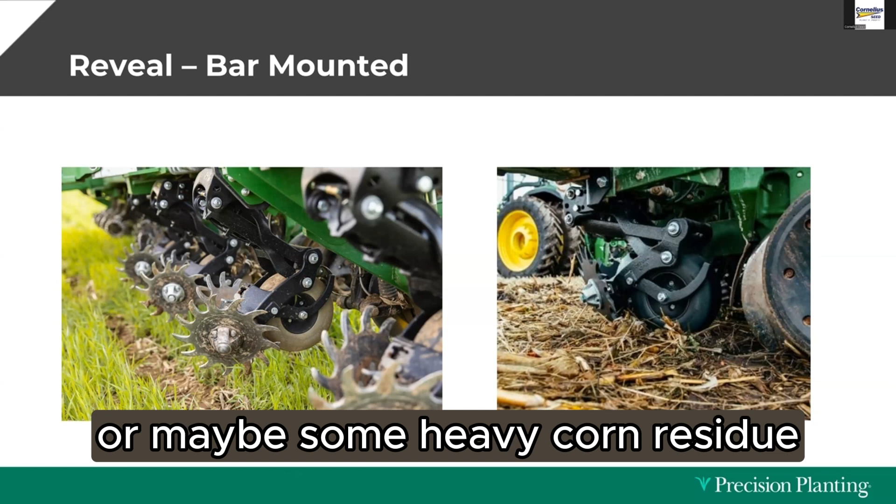Get into some heavy no-till or cover crops or maybe some heavy corn residue, and I need some more tine length to help me move that away. I can adjust that T-handle to where that wheel goes up, and I've got the full tine engagement into the ground to help me clean that system.

So we're really excited about these. We've seen some great results from them, but we're changing the way we're thinking about these things to help improve that emergence factor for you guys.

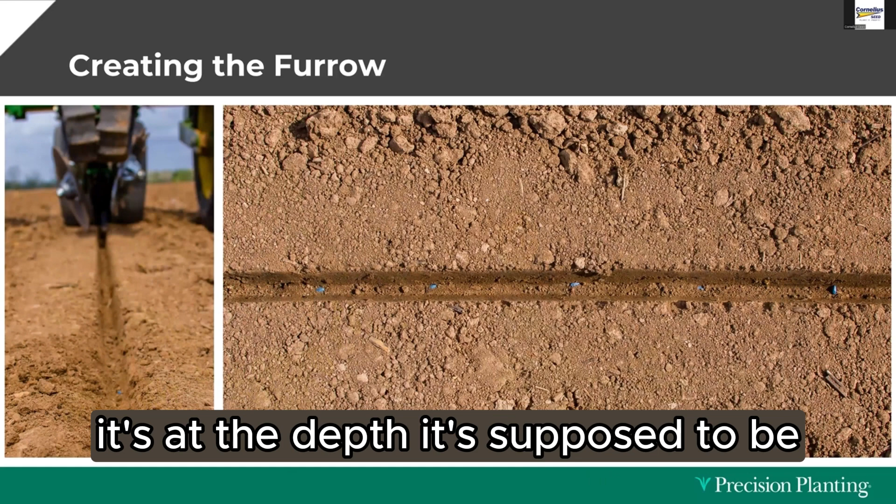As we talk about creating the furrow, we talk about making sure that that furrow is wide. We talk about furrow integrity, that's really one of the terms we like to use. A furrow that is wide, it's at the depth it's supposed to be, it's holding up as we put the seed in the bottom of that trench as we go through. So what are some things that cause us issues with that?

One is furrow width. Now, we look at this tool here, and a lot of people call it a seed tube guard. And it's doing that, but actually I think that's a false name in my opinion. I think this needs to be the furrow width or the furrow integrity guard because it's setting the width of our furrow. As I think about my disc openers going in the ground, if I've got a worn out seed tube guard, my disc openers now have pressure on the outside of them.

They narrow up and I've got a narrow seed trench. And I end up with what's on the left side there of a seed that gets hung up on there and I have air pockets around it. So I need to make sure that those seed tube guards are wide and helping protect my furrow width.

When we look at those seed tube guards, they are worn out at 3/4 of an inch. So if you guys can fit a 3/4 wrench on them, they're worn out. They are 15/16 or 7/8 brand new. There's not a lot of wear life on them. So make sure you're watching that.

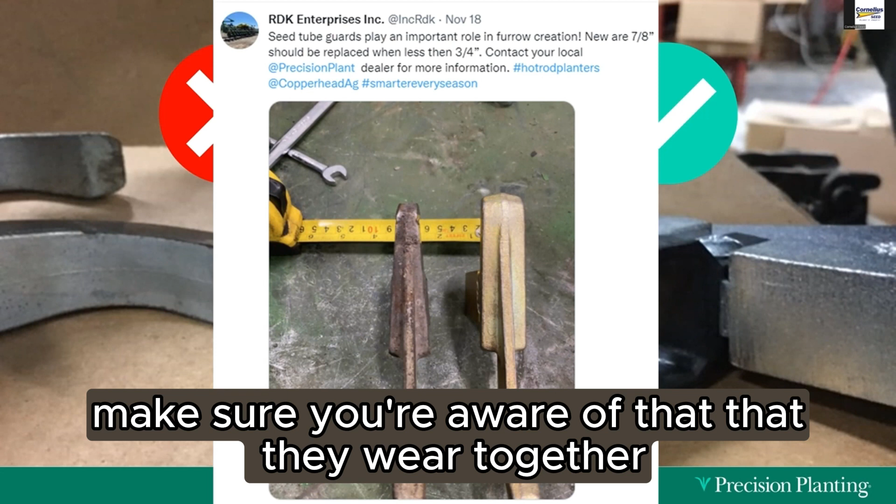We have seen those things down very, very narrow on guys' planters. I've seen guys replace disc openers and not replace those. These are items that wear together. Make sure you're aware that they wear together, and when you replace disc openers, I would just go ahead and replace seed tube guards.

One of the cool tools we got, actually we were able to see it at an Iowa State thing, but this is a closing wheel lockup tool. This helps you evaluate your furrow.

One of the hard things we've always had is we take a planter pass, we go back and we dig and dig and dig and try to find seed and find our spacing. And if you're like me, I flick the seed out of the trench about 90% of the time or move it, and then I never know where it was.

This tool allows us to lock that closing wheel tail up, plant for 50 feet, and be able to see that trench open. Did I hold the sidewall? Did I create a good furrow? Is my seed at the bottom? Am I planting into moisture? I can evaluate all that without having to dig.

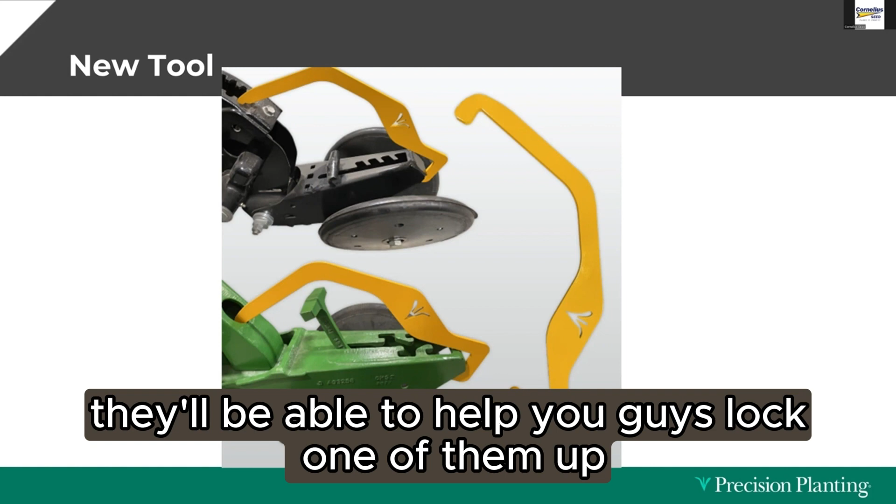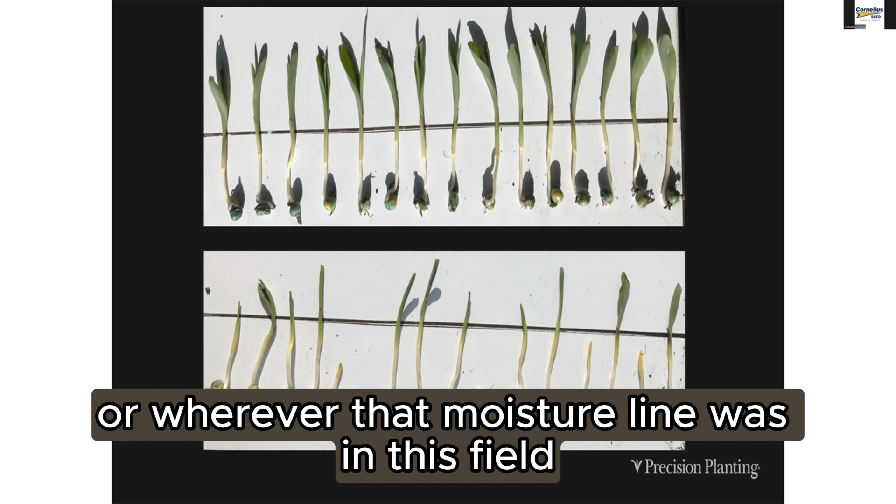So emergence, as we think about getting that crop up out of the ground all at the same time, we talk about moisture, right? Planting depth, planting into that moisture line. And we can look at both these lines and say the seed was planted at the right depth. Both sets of these seeds were planted at that good 2-inch depth or wherever that moisture line was in this field. But we've got different emergence levels because moisture was different in both areas of those fields.

It was the same field. The moisture level in one soil was lower than it was in the other. And we've never been able to see that, right? We had to always pull in, plant a little bit, dig, find that moisture line, and assume it's the same throughout the whole field, right?

How many of you guys have one soil type in all your fields? We don't, right? Nobody's raising their hands. This is north central Iowa, as close as we get to one soil type in a field, right? So if we don't have that, how do we know? This goes back to having that visibility.

So one of the tools we built that I really think is pretty innovative, and there's nothing like it out on the market, is what we call the smart firmer. It replaces your seed firmers, your Keetons, but it allows us to get some readings, one of them being furrow moisture as you go across the farm.

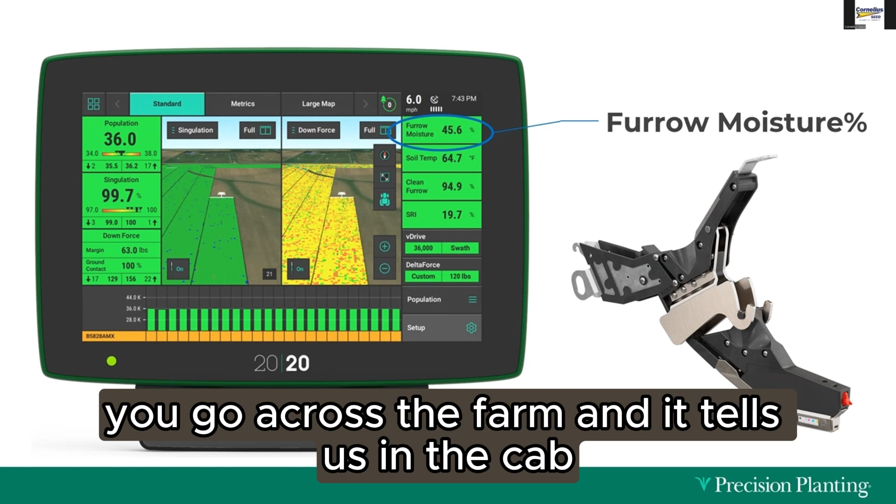And it tells us in the cab if we're planting into proper moisture. Do we need to make an adjustment as we go across the field to get this into moisture and make sure that it is properly going to germinate at the same time as everything else? This is a tool that, in my opinion, is invaluable as we plant today to make sure every seed gets up out of the ground at the same time.

Not only does it give us moisture, it gives us furrow integrity, basically looking at cloddiness of the soil. It gives us clean furrow, looking at residue. It gives us soil temperature. It also gives us organic matter and CEC maps as you guys go across your farms. So it helps you remap some stuff, create some new zones as we look at that.

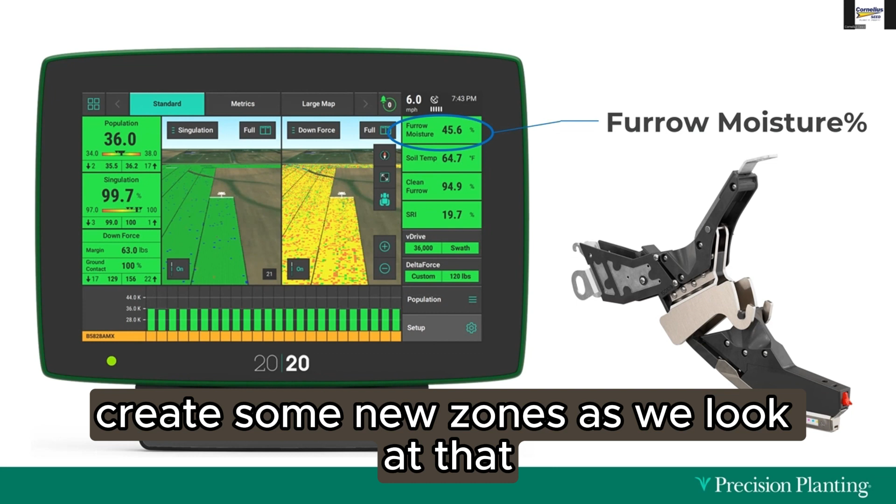But one of the ones that I really like is that furrow moisture value. It gives us something to ensure that we know we're in the moisture line.

We've got air gaps. We're going to increase disease pressure, seedling blight. Air pockets in there are going to dry out that soil and cause it to not allow it to germinate because it's going to keep it dry around that seed. So a number of issues.

So as we think about closing, we look at it as soil density management. We want to make sure that seed has seed-to-soil contact and that we have good aggregate to that soil. So it's soil density management as we look at it. We want to create a sidewall with those gauge wheels. We want to firm the seed into the soil, but we want to close from the bottom to the top. And that's where a lot of times we miss on our closing wheel systems, is that closing from the bottom to the top.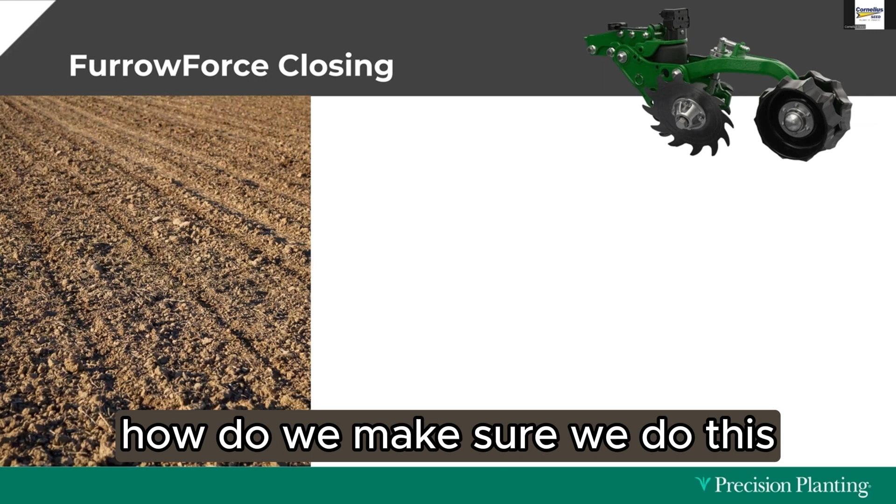So just like our row cleaning systems, we've done research and helped you guys manage and select the right row closing systems over the years, and really gone through and said, okay, how do we make sure we do this? We couldn't do it with the existing equipment out there today, so we designed what we call FurrowForce.

It's a two-stage closing wheel system with the front wheels being toed in and cambered, and it lifts that soil profile as it goes through and drops it and lets it fracture. Then those back wheels come along and set that soil density. The drier it is, the more weight we can put on those rear wheels to pack that down and get capillary action of moisture back up to the seed. The wetter it is, the lighter we run those back wheels to make sure we're not creating compaction layers for that seedling to come up through as it's growing.

So making sure that we have the right systems on there is crucial to get that system closed out. We've done a number of closing wheel studies on there.

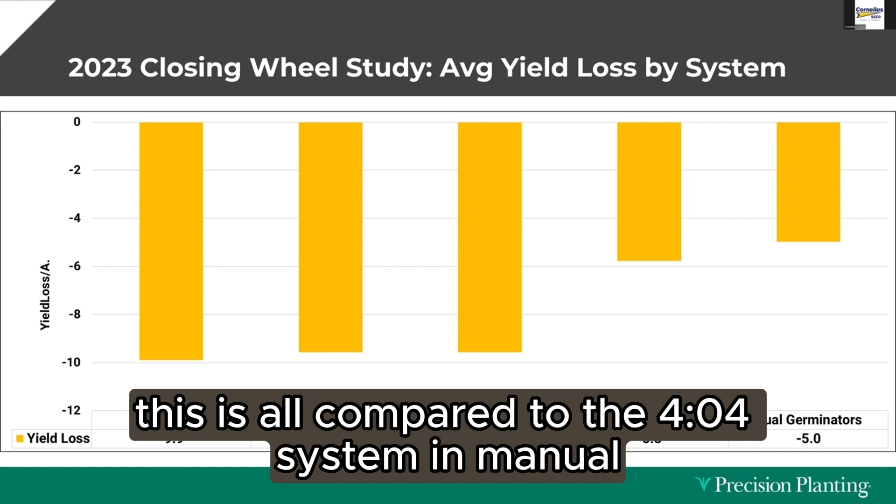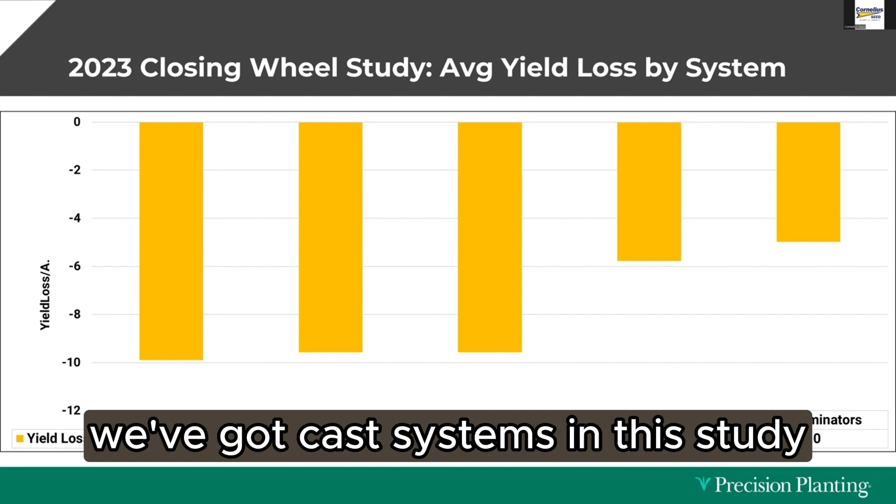This is all compared to the FurrowForce system in manual. The FurrowForce system can be ran in manual or automated. Here you can see these different ones we used. This is the average across all tillage types. So we do a no-till situation, a vertical till situation, conventional tillage, and strip till - those are the 4 different tillage systems we do on the farm. This is all of the results averaged together across all the different tillage systems. So you can see those different systems, a lot of probably what you guys have out today. We've got dual rubber systems, short spikes, long spikes, and cast systems in this study. Kind of covers all of the different areas.

But you can see where that FurrowForce system, being cambered and toed in, lifting that soil, where none of the rest of these are doing that. We're not getting that lifting action of that soil profile to let it lift and drop and fracture. And that's where that stands apart.

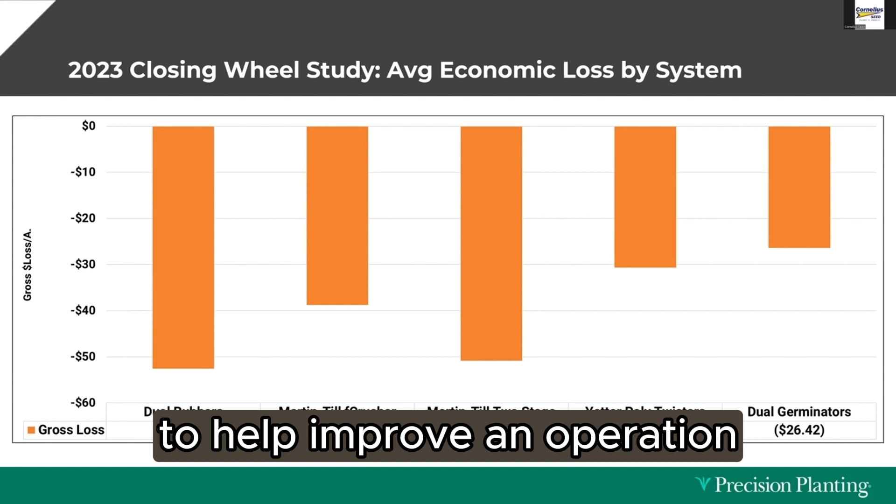So you can see it not only on the yield side, but even when we add the cost of the equipment in, what the benefit of that is. We're still an ROI, still a positive ROI above and beyond all the other ones. So not only when you guys select equipment to help improve an operation, do you need to see that it gains yield, but you'll also need to look at it and say, is it helping me on the financial side?

Yeah, they score okay in conventional tillage. That's a very political way to answer that, but they score okay.

And this is all available. If you guys want this, get a hold of your local precision dealer. They can get you the PTI results book. You guys can look through all of it. I think there's like 160 trials that we publish, and it has all these different ones in there. So you guys can get with a precision dealer and have them send you a copy of a PDF of that. So, yes, dual rubbers struggle a lot.

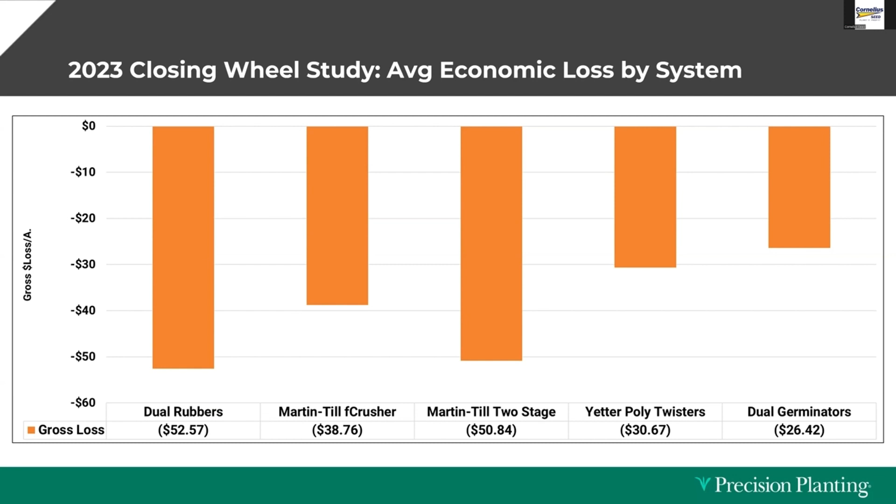So with that, the last thing I wanted to do is kind of talk about the future, what the technology is. Everybody kind of looks to precision as what we're bringing, what we're innovating in the industry. What are we doing? What's coming next, right?

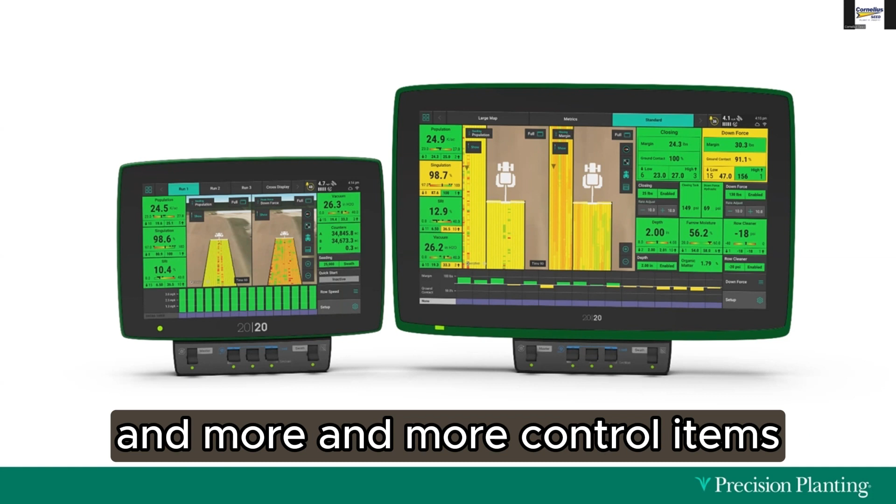So one of the things we've introduced here is what we call our Gen 3 display. It was a 10-inch display, the one on your left-hand side there. And that's been out for 2 or 3 years now. And the number one thing we keep hearing from guys, as we add more and more stuff to our planters and more control items, is 'I don't have enough real estate, but I don't want to run multiple displays.' We fixed that for you - we just made one display bigger.

Okay, so now we have a 16-inch display. It actually has over double the screen square inches on it, and it's the same functionality. It goes right on there. You're able to customize that display, move all the metrics around to where you want it.

One cool thing I always like to say is when Dad gets in the planter, he likes to look at certain things, and the son gets in the planter and he likes to look at them. You can make your own screens, and all you got to do is one touch of the button, switch from one to the other, and be able to see what you want to see versus what Dad wants to see, right? Some guys say they also like to simplify it for Grandpa, right? Take a lot of the button pushes away for Grandpa, right? So there's a lot of options with this display.

We're excited to get more inches out there for you. But as we think about adding things like smart firmers, like I talked about, think about all that data that you could have and be visualizing and see.

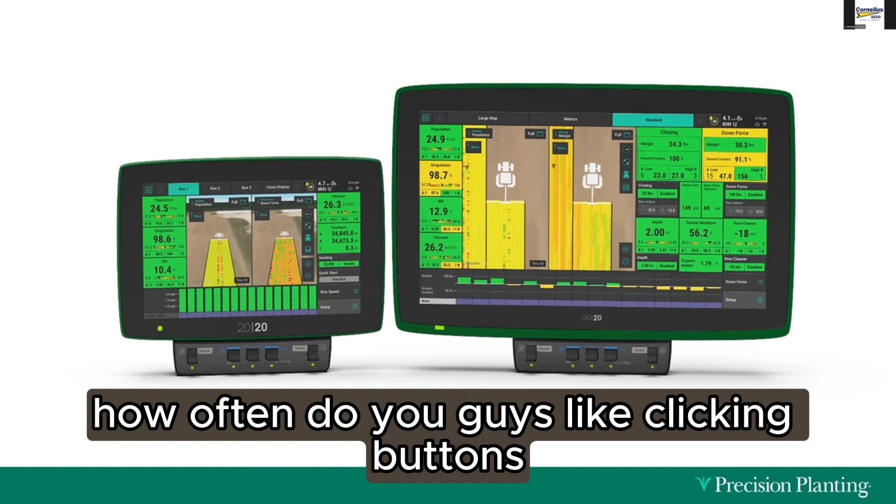And if I don't have enough room on my display, I have to deviate from the screen. How often do you guys like clicking buttons as you're going across every pass of the field to see other things? We don't, right? We want to have it all visible to us as we go across the field.

The next thing we introduced is our new data analysis and data platform called Panorama. This is our new platform that allows us to view, analyze, summarize, and share data back and forth. It's going to allow you guys to manage your data. It connects with those Gen 3s, those .2020 files. A .2020 file, that Gen 3 is connected to Wi-Fi and Bluetooth, and it sends that up to the cloud. So now you have that data as soon as possible, right on your phone or on the web to view, analyze, or share.

One of the cool things is, as we started working on this, we've had a lot of people come forward and say, hey, we want to make sure we're able to be compatible with your platform. One of those is FieldView. The other one is John Deere Operations Center. So now with Panorama and Gen 3 files, you guys can send those back and forth and share those files freely and get that data where you want it.

The third thing we talked about at Winter Conference this year is our Cornerstone planting system. It's a new row unit design, all integrated precision planting stuff designed by us. We get the ability to factory flex-build that, so you can customize how you want that built. It can all be put together in the factory, comes to you, you bolt the U-bolts on, you plug the wiring in, and you're done. It's all installed for you, ready to go.

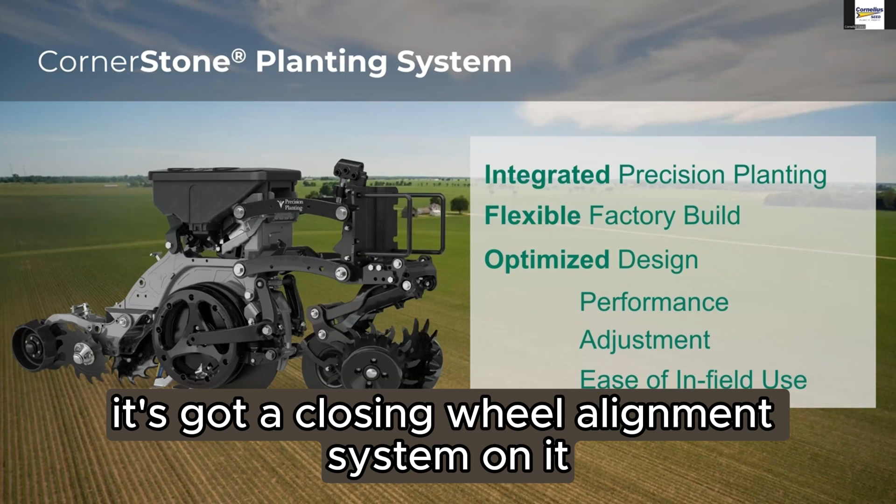The double bushing parallel arm kit has a closing wheel alignment system on it, which allows us to change the angle of that closing wheel to make sure it's tracking through behind that row unit as we close. We're really excited about this as we move into the next few years of supplying you guys with the proper row unit that's going to hold up and be easily managed going forward.

The other big area of precision planting is going into sprayer technology. We always step back and say, okay, let's really help growers in areas where their inputs are the highest - seeding and fertility. We've really covered those areas the last 5-10 years for you guys, improving visibility and management of those systems. So we stepped back and said, what's the next area you guys need help with? And sprayers was an overwhelming answer. Your chemical inputs on your farm are one of the next highest inputs you have on your operation. And let's be honest, has the technology changed?

It hasn't, right? Speed and pressure. We always make the joke, but that's really what it is. It's speed and pressure.

So how did we step back? We said, hey, we think we can modernize some of this. Let's go look at it. And boy, we dug deep and went deeper and deeper. I think we finally found the bottom of this, but we're starting to come back out and say, okay, we've got some solutions for you guys.

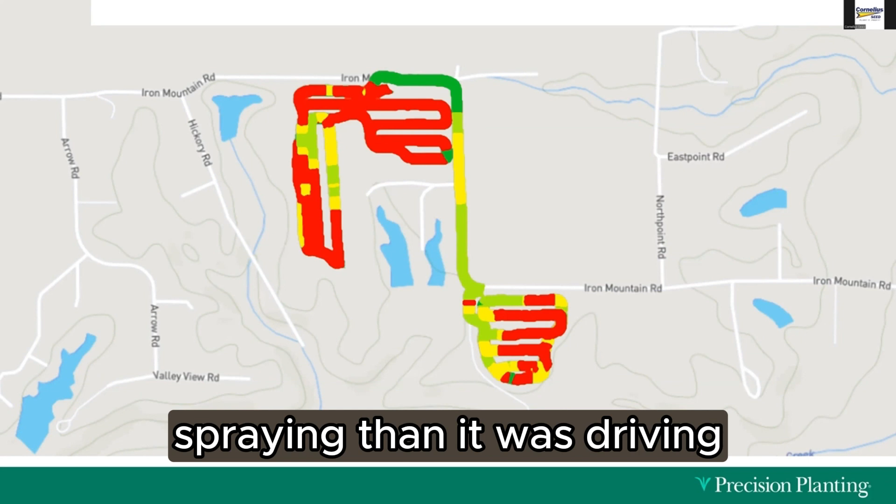What's shocking is we put a heart monitor on a sprayer operator, with 120-foot booms traveling at 10 miles an hour across the wide open field. His heart rate is higher in the field spraying than it was driving a big machine not made to go down the road. You can see right here, this is in a field, then he pulls out on the road and goes down the road. His heart rate slows down. The green is a lower heart rate. He pulls back in the field and his heart rate immediately goes back up.

Spraying is a nerve-wracking operation, right? We're more nervous in the field spraying than when we're driving that big machine down the road, because we want to make sure we do it right. The guy running the combine is going to find everything you ran over, right? So we're a little nervous, especially in post pass. But we want to make sure we're doing these things right, not wasting chemical, and not having any errors as we go across the field.

As we went through these things, we came up with a suite, and we're still building on those as we go. One is a boom reclaim system, or boom recirculation system. Basically, we replumb the ends of each wet boom. We have a return line back to the tank and two ball valves. Hit a switch in the cab, and now I can purge everything out of there and send it all back to the tank. I no longer have those dead areas in the end of my wet booms where chemical can settle out and cause spraying issues going forward. But also, when I clean out, I know I'm truly cleaning that whole boom out. I can also prime the boom with this system, so I can hit the button and know that I have product at every nozzle.

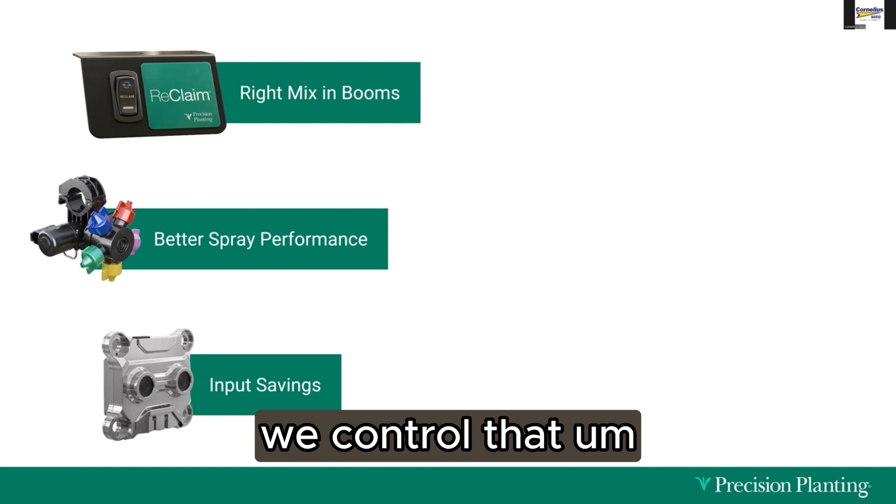Better spray performance. We have our own PWM nozzle body system. At this point, we take over that sprayer. We put the 2020 in the cab, and we control the pump, the rate, the pressure, and the nozzle as we go across the field. We'll have about 200 of those spray nozzle systems out here called Symphony in the fields this year.

We're working on camera systems to do target spraying or spot spraying, so we only spray where we need to spray or bump up the rate. But not only with those cameras, we're also going to have scouting included. These things will be able to map all your weed pressure, differentiate between grass weeds and broadleaf weeds, and show you where those pressures are in your field so you can make prescription spraying recommendations in the future.

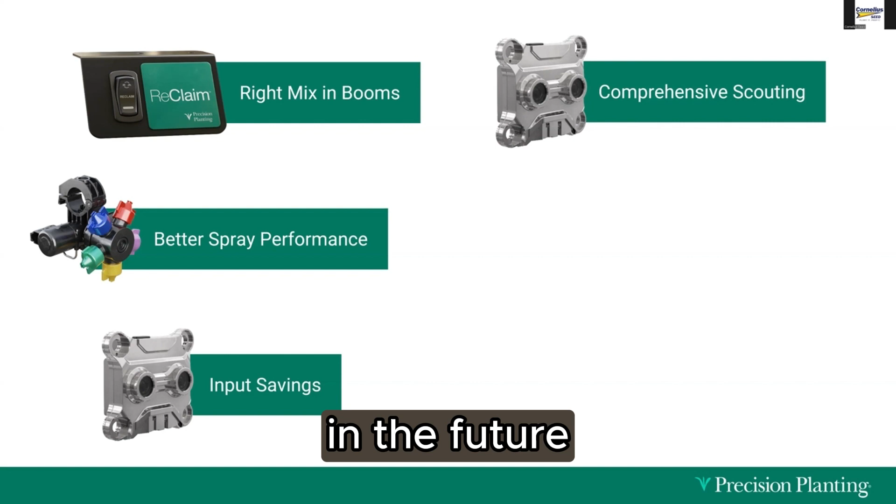Not only are we doing that with the cameras, we're also going to do post-emerge guidance for you guys. As you're going down the fields, if it sees that visual line of crop, it'll steer the sprayer off that line and keep it off the crop as we're spraying in different kinds of contours and straight passes across the field. And then again, pairing that system back with our Panorama data system, making sure we're giving you guys the right data to make management decisions moving forward.

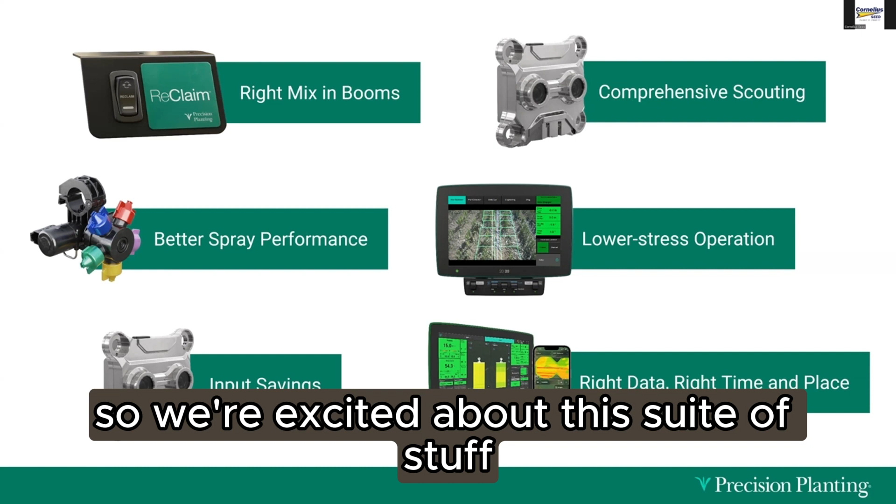So we're excited about this suite of stuff as we go forward. If the sprayer stuff interests you, make sure you're connecting with your local dealers to get those things or get on their list. We'll have about 200 of them running out here this spring. So if it's something you want to see, most local dealers have sold them, and you can get on a sprayer and maybe see something close and see how those are working.

And the last thing we're working on, I promise this is my last slide. I think I did a lot better today on my timing, because yesterday I made us really late since I was talking too much. But my last one is the last thing precision planting is going into: a new era in soil fertility.